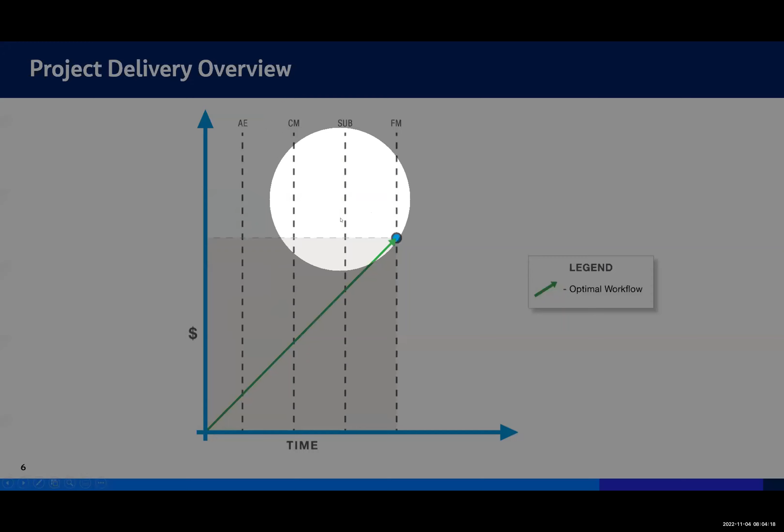The green arrow is the order of magnitude, the optimal workflow of how much work happens to deliver a project. Every project goes through different stages between architectural engineering design, construction management, or some sort of construction, and then we turn it over to trade subcontractors, and ultimately over to the owner, where the process of facility management operations starts.

Again, the easiest way to get from A to B is a straight line, but we all know that's not exactly how this happens.

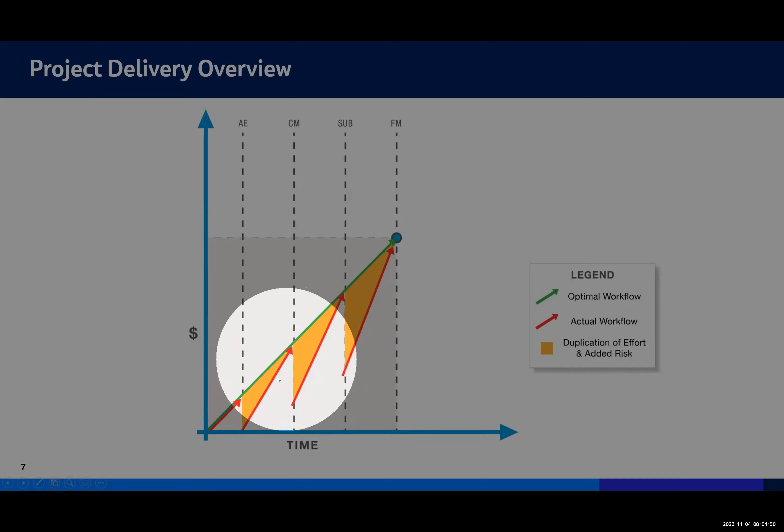Every single time we go through a handover, whether between our own engineers or to construction management or subcontractors, we have a drop in data, a drop in intelligence. There's a certain amount of rework needed to catch up to that optimal, perfect workflow that doesn't exist and will never exist.

So the red arrows are the actual representation of the actual amount of work that happens on a project to get it completed. And the orange areas, those little triangle areas below, visually represent where duplication of effort happens, the added risk and problems on projects, your change orders, all the issues we deal with that are not optimal workflow to deliver a project.

So if we truly want to understand how much effort it takes to deliver a project, we simply straighten out those red arrows. The order of magnitude you see now is how much it actually takes to build a project, and how far out it goes beyond that optimal perfect workflow depends on how integrated our project teams are and how optimal our workflow truly is.

So the extra time down here is the extra time our projects are really truly taking, and this is the extra amount of money it takes to deliver a project from the owner's perspective compared to that optimal workflow.

All we're trying to do with technologies and everything you're doing comes down to value, and how we can make the timing better, shorter, and cost less. So all we're trying to do in the overall process is reduce this delta, the extra time and extra money it takes to deliver a project.

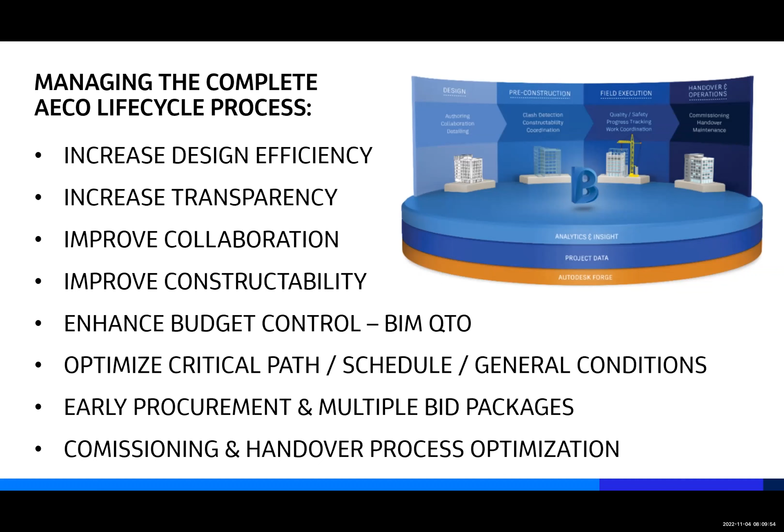But again, it takes us talking to our clients and letting them know what is possible out there. And when we look at current procurement methods, this is the challenge, right? How do we deliver all of this within the current constraints of project delivery?

So I did a class just a couple of years ago at Autodesk University, where it was actually a roundtable where we talked about project delivery, and we're trying to figure out what project delivery method is the best for your project, and why? Why should you choose one over the other? And we look into, how can we work within these constraints to deliver best projects?

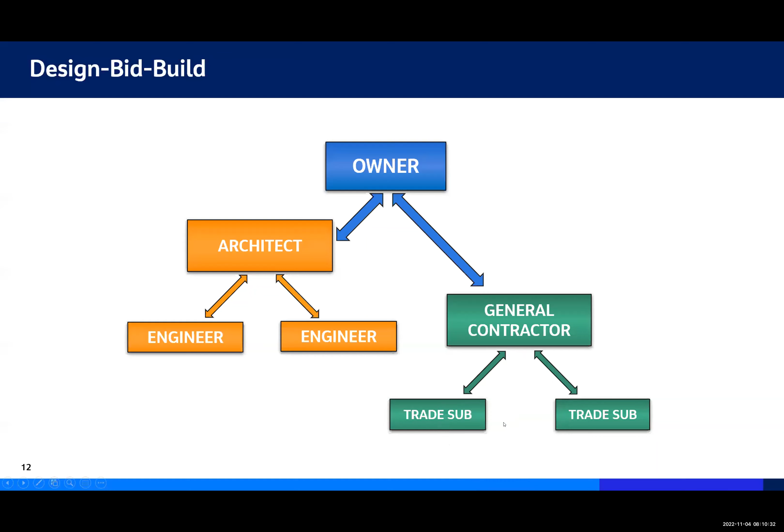So again, we look at design, bid, build, traditional, right? The owner is contracting with the architect and general contractor after bidding, and we have our engineers and trade subcontractors. A very traditional way of delivering, which seems to be fairly fragmented, right?

Then we have the currently very popular CMR process, the construction manager at risk, where the owner hires the architect and the construction manager at the same time, typically, or closely related. But then again, we still all have our subcontractors and engineers, but there could be that correlation to where there's a lot of design assist between how we deliver our engineering and design, since the contractor is hired at the same time. A little bit more integrated, right? But there's still a lot to be desired in terms of the process.

Design build, also very, very popular. A lot of different ways of doing design build, either through a design build contractor that hires all the subcontractors underneath, which has architecture engineering embedded, or sometimes the owner hires the contractor and then we work with the contractor, which I know a lot of us have our hesitations towards working for a contractor, right?

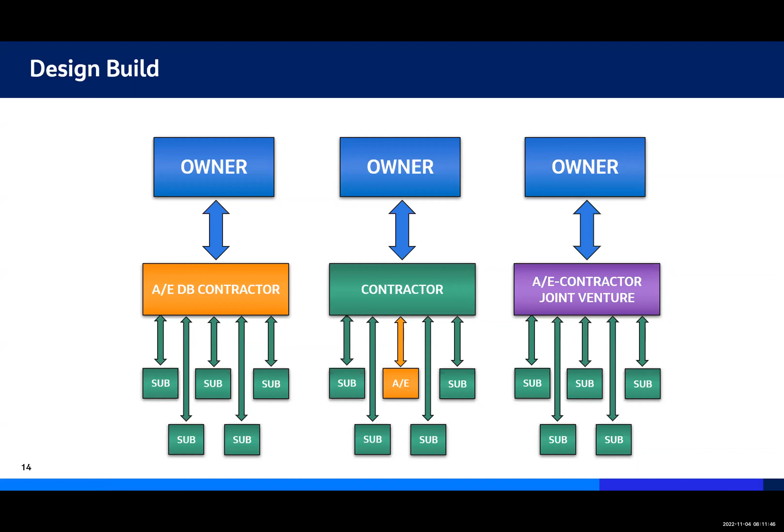And then we have a situation where the owner hires a joint venture, where we as the AE may joint venture with a contractor, and then we work together to do design build. And again, a lot of opportunities there, but again, there's still a lot of issues that can happen along the way. Still not optimal.

And ultimately, there's IPD, right? And for those of you who have done IPD projects, how many IPD projects are exactly identical? Right, there's a lot to be desired there. Yes, it's a lot more integrated, but again, the owners are still trying to fight the whole issues about having shared risks, shared rewards. They try to push their risk away as much as they possibly can. It can go really well, it can go really bad, right? And there's no prescribed way of what IPD is.

It's typically up to each individual contract to really define who does what when. And in this roundtable, we really looked into several factors, looked into contractual obligations, what the instruments of service are, liability, right? Are we delivering models? Are we delivering drawings? How are we delivering this whole process? And who does what, right? What are we contractually obligated to deliver?

We looked at different collaboration technologies and how much we actually collaborate between each and every one of these project delivery methods. What type of technologies are prevalent? What types of roles, responsibilities do we have as part of this?

Trying to understand who is doing what, why, looking at budget, schedule considerations, and the vast amount of folks that were in this roundtable, which was actually an online roundtable during COVID, fairly large, about 200 to 300 people. We concluded that really there is no one perfect method.

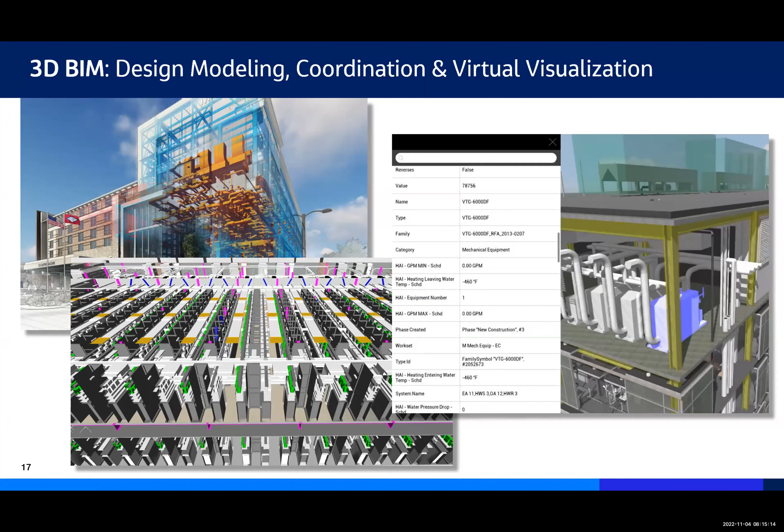So 3D BIM is the start of everything. We do everything in models. We're delivering all of our construction documents. All aspects of the project are going back to the model. We're doing design modeling, all of our coordination, spatial coordination, clash detection, visualization. Everything starts with that 3D BIM.

We're performing a lot of virtual design reviews. We're running a lot of clash detection between different elements. We track all of the issues associated with the projects that start in the models. We're trying to make the process much more intuitive rather than coordinating in 2 dimensions on drawings.

Greg mentioned a lot of different seminars and task forces that we work with NCARB on. We're looking at the future of what our industry is going to become. We're looking at that responsible charge - what have we been doing with our project delivery versus where we're going in terms of what our responsibilities are as architects, and what will responsible charge evolve to.

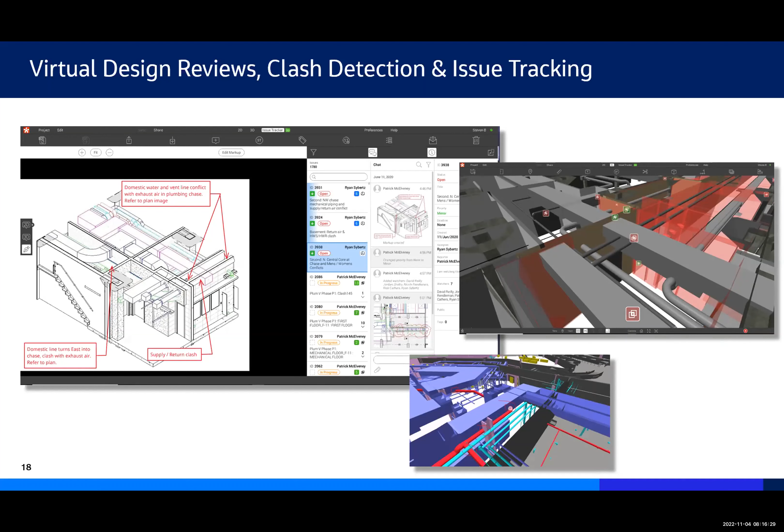What are the instruments of service? Are we starting to produce models more so than drawings? What level of drawings are we going to be producing? This is very different than the old ways of delivering drawings as the instruments of service, coming into a lot more model-centric approach. That's where all these dimensions of BIM are geared towards - exploiting the one source of truth that we have into multiple different use cases.

Along with 3D BIM, you might have heard this concept of LOD, or level of development - level 100, 200, 300, all these different concepts of what the requirements are. A lot of owners are starting to be a lot more savvy in terms of requesting different levels of development and different deliverables, because they typically hire architects on their own teams to streamline what they get at the end of the day and make sure they're not paying for something they're not using, but at the same time make sure the delivery teams understand exactly what they need to deliver.

So LOD is a concept brought by the BIM Forum, and it's a level of development. There's a whole big document called the Level of Development Specification that talks about, within each and every category, each and every spec section essentially, what level of development means for those elements. In the simplest of terms, it's the level to which we are required to develop our models in different systems and different components in a model.

So LOD 100 is kind of the most basic. You would think about this if you're doing SketchUp modeling, some schematics - you're developing very schematic type level of development, typically suitable for early conceptual design.

LOD 200 takes it a step further. You're starting to introduce some generic ideas, like hey, this is a column. It's not just a mass, it's a steel column.

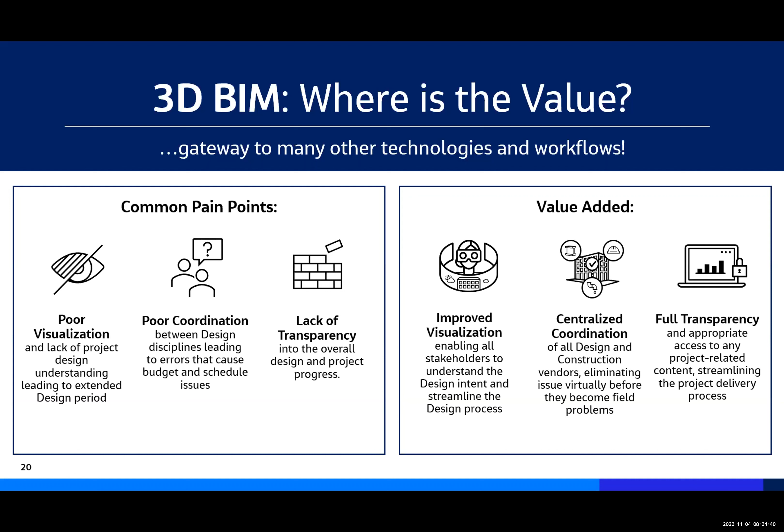And again, 3D is truly a gateway to all the other things. It's the benchmark. We can excel anywhere else with pretty much all the other technologies I'm talking about today. You can't go any further without starting with 3D design. So it truly is a gateway and a starting point to a lot of different things.

The next thing I really want to talk about is 4D. Once we have the 3D models, what else can we do with them? Well, one thing is 4 dimensions, right? Assigning the aspect of time with the modeling. We're able to really clarify the construction process and help our clients visualize, help the whole project visualize what this project truly looks like.

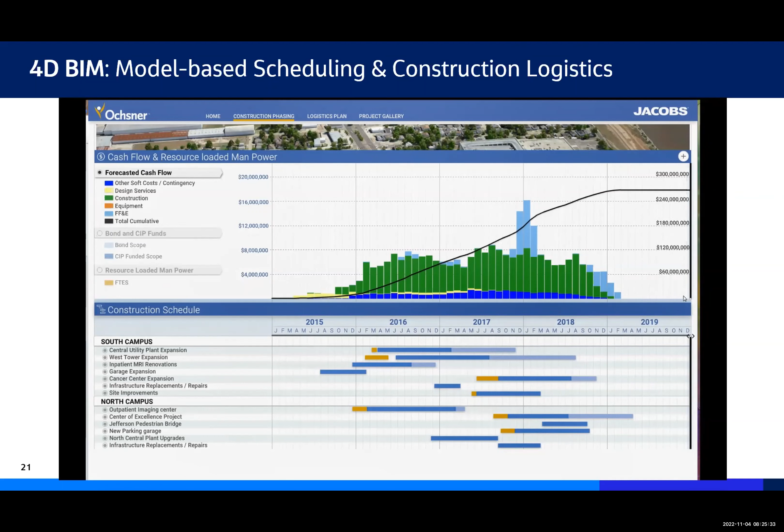We're able to look at a lot of metrics, a lot of different information, track the project much closer, and improve upon that scheduling aspect of the project by using the model elements, aligning them with the schedule elements, and looking at that progression. The reason why this is important is oftentimes schedule is a completely separate effort done throughout the construction process that doesn't have anything to do with modeling.

A lot of times there are issues that happen because of either poor scheduling, the schedule doesn't really get updated, and projects get behind schedule. We really don't have good visibility into what's being built when, what's the current state of the construction progress, and how we're progressing against the planned progress. It's very difficult to visualize this if we have a schedule completely separate from the model and design.

Furthermore, right now there are still a lot of projects required to be design-bid-build, that very disjointed process of design and construction. If we, as designers, still don't really try to understand how this project is going to be built—what does the logistics look like, how can we phase this to best serve our client—again, this is a contractor responsibility, but we need to work together to really optimize what we're designing versus what's being built, and how we stagger these processes to be much more efficient and serve our clients the best way possible for the most efficient projects.

So again, with 4D BIM—in a traditional way of scheduling projects, there's typically very poor communication between the teams during design and construction, and with the owners. Schedules are hard to read, and it's very difficult to align the two together, causing oftentimes a lot of different issues. The traditional scheduling process is very time consuming, updating the schedules. Because it's so disjointed, there are a lot of opportunities to make errors, and projects do oftentimes have a lot of errors with schedules and sequencing of how work should be done without the logistics analysis with the modeling. When we add the model aspect to the scheduling aspect in 4D BIM, we're improving the communication.

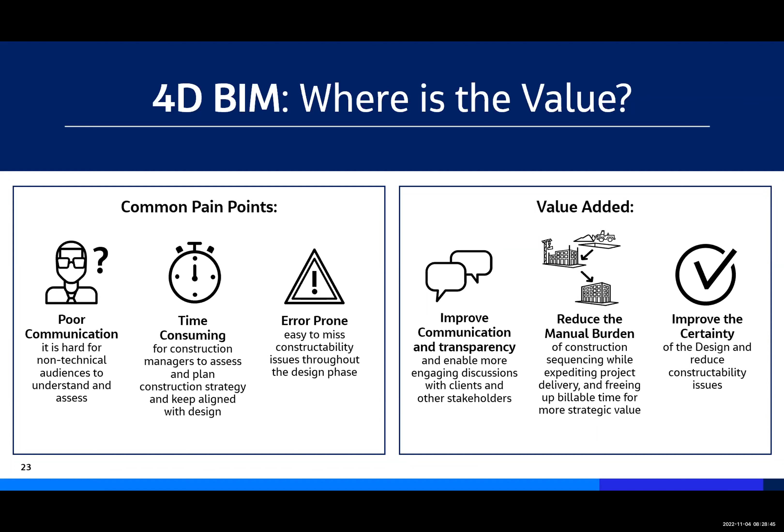When you look at construction sequencing and everything else, it's a very manual process, and we're really adding more intelligence and transparency to this, which really adds to the certainty of the whole process. Once we are aligning that model to the schedule, we know whether things are going to work or not, and we're able to correct those errors before we figure them out too late in the field. Hopefully that clarified what 4D BIM is and what the purpose of it is.

Taking that a step further, if we have detailed enough models, and I say this very carefully, if we have detailed enough models, we're able to pull quantities directly from the models. This typically does, when we talked about those procurement methods, 5D BIM takes it a step further. If we are sharing all of our models with the contractors, a lot of us put disclaimers: this is not for construction, this is just to inform the contractor of the overall general arrangement. I've seen a lot of types of disclaimers associated with sharing the models. But if we're truly exploiting the best of BIM, we would be working in a somewhat shared model. We would be inviting and co-creating to make sure we can leverage these models for quantity takeoffs.

Taking model-driven estimation can really benefit the owners greatly. If we do our own design models and a contractor does their own construction models, and then they do their quantities from their own models, that's just not a very streamlined way to do that. We can do this, but we have to think about this ahead of time, so we're not caught into, well, contractually I'm obligated to do X, Y, Z, and I'm not doing this. This is where the inefficiencies happen.

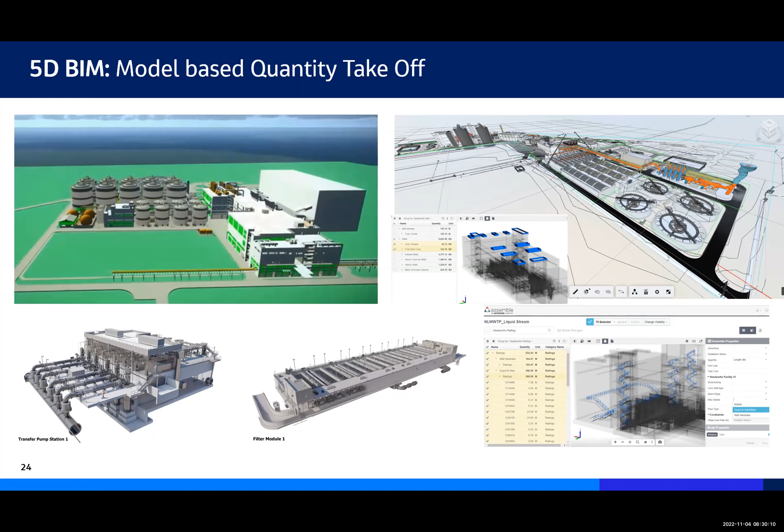And if we are in an integrated type of delivery process, we can start thinking about visualizing and quantifying that model, helping produce cost estimates and assist with a lot of different cost-related functions in a project. A lot of you might have heard the term QTO, which simply stands for quantity takeoff. We're really aligning the cost line items with model items, assigning the cost factor to model elements, and having a good understanding. This is why I said that LOD. If we're going to go to this level of detail, we have to understand what is modeled versus what is not modeled.

And the estimator must understand, okay, what else do I need to account for? All the general conditions, all the things that are not in the model. How do we really pull this all together into one seamless way of informing our client what we're doing, and what this project is really going to cost?

So what is 5D BIM solving? The common pain points of our current or typical process is that cost estimating is typically very slow and very labor intense. And we only get certain times where we do a cost estimate throughout the process. That's kind of the spot check at that certain time of, hey, here's what we think this costs. Probably it's beneficial to understand that, but it can be better.

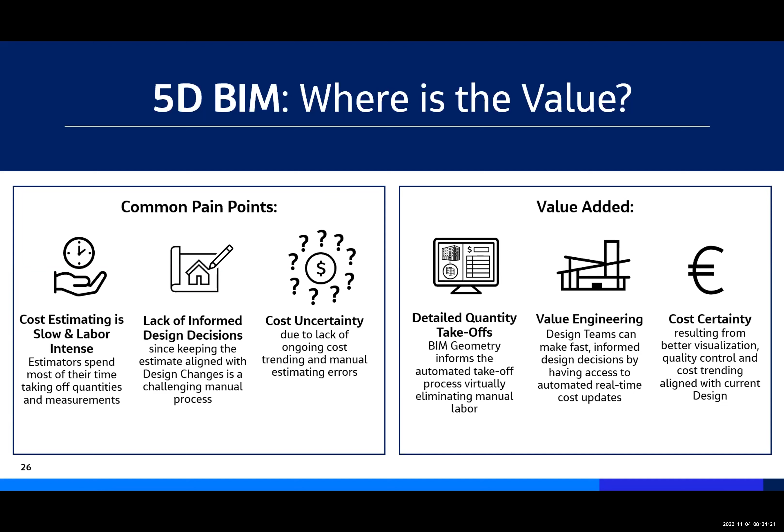But when you think about the ability to improve the overall project - and I'll talk about this a little bit more - our additional expenses to do all this are just a mere drop in the bucket of cost compared to the overall benefits to the owner and to the overall project.

I've been talking for a while. Hopefully I'm moving at a decent pace and not too fast. Any thoughts, comments, team? All good? Good to proceed? Good, all right, keep going. Let me know if I'm moving too fast, because I can slow it down a bit as well.

So 6D BIM, again, this is yet another progression. You've heard about digital twins, probably all the zinger words in the market right now, a lot of different platforms. I have a whole section at the very end for digital twins that I'll touch on. But the 6D BIM is essentially this handover process.

Everybody wants these digital twins, digital replicas of facilities that we're designing and constructing. So the concept of 6D BIM and digital twins, for our built environment purpose, is we're taking these 3D BIM models that we have diligently produced throughout the design process and probably adapted throughout the construction process.

We're adding a lot of information to it. We add a lot more detail about the built environment as we're constructing it - model, manufacturer, serial numbers, installation dates, warranty start dates, a lot of the nameplate data that owners may be using for maintaining their assets long after we're off the site. We're combining that 3D BIM and enriching it with all this information from the construction process.

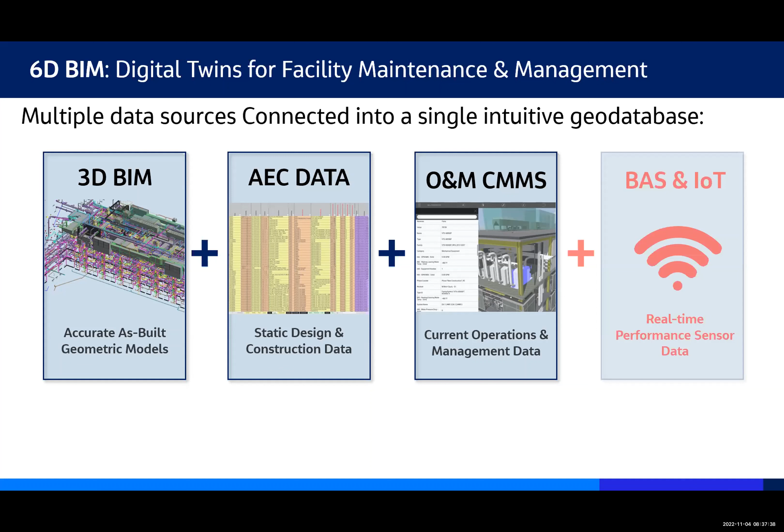We can tie that back to the 3D model, and we can provide real-time IoT, Internet of Things. We're adding a lot of sensor data feeds about current temperature, occupancy, humidity, any sort of factors about the current state of the built environment. We can provide that information as a layer on top of that 3D visualization, and we can provide tie-ins to building automation systems. We can start automating. You probably all have some sort of automation systems in your houses by now, a smart light, a smart outlet, or any sort of smart building systems. All this can be controlled and managed through a digital twin of a facility.

The whole point here is we have the ability in 6D BIM to create this single federated, uniform platform of all the systems and all the information about the built environment, including the ability to understand how it currently operates, as well as operate it and control it through the use of these digital twins. And that's what 6D BIM truly is.

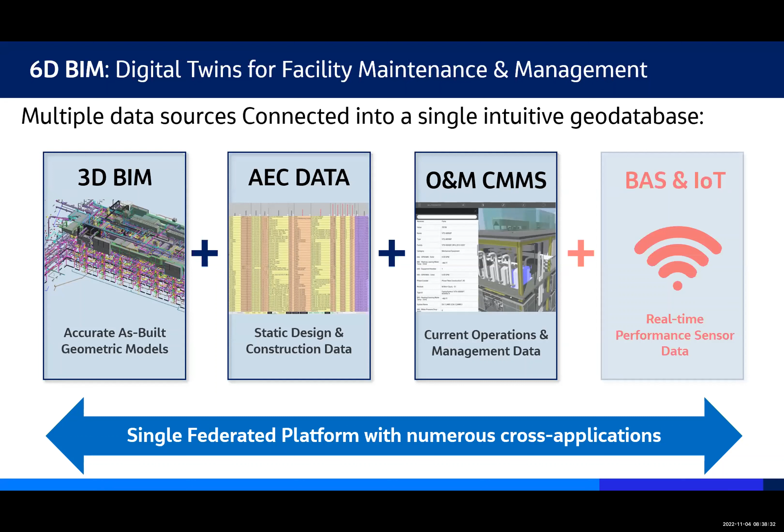I've heard sometimes this is referred to as 7D BIM. Sometimes they put in a 6D BIM as sustainability related. I'm still kind of keen on the approach of 3D, 4D, 5D, 6D BIM, with the 6D BIM being that digital twin handover of facilities with the models that we're able to create. So truly, like I said, the digital twin is in the center.

It doesn't mean that all information is in one place. You're not thinking that everything is sucked into this digital twin, or that we're going to push all this information back into our Revit model. That's really not the intent here. The intent here is to create the one place. The digital twin is almost like a hub that gets information from different resources. So again, the digital twin can get the geometry from 3D BIM models.

It can get all the asset data, the nameplate information, from COBie. A lot of you may have heard of COBie, which a lot of our clients, especially government clients, are requesting, which stands for Construction Operations Building Information Exchange, essentially a giant spreadsheet tied to the model that describes those model elements even more with that information.

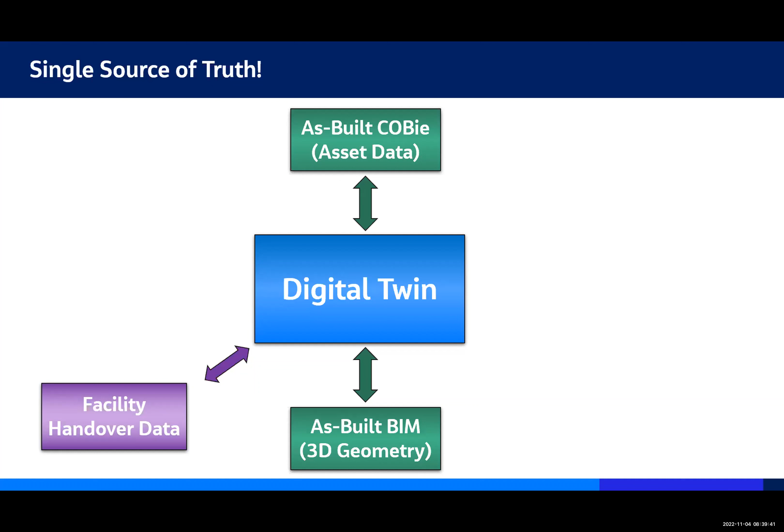The digital twin can get that information from facility handover data. Again, this may be stored somewhere in some sort of common data environment, Google Drive, server, whatever, but it can be organized in a certain fashion to where you're getting that information through the digital twin, so you don't have to go browse different locations for all this information.

Digital twins can tie back to CMMS systems. CMMS stands for Computerized Maintenance Management Systems. This is to manage your work orders and really to manage your assets as the owner. Again, you've probably heard of Maximo. Maximo by IBM is probably one of the most famous CMMS systems. But again, the digital twin doesn't replace the CMMS. It simply draws that information from the CMMS systems and is able to synchronize that information between the two systems.

And like I've mentioned, IoT data, sensors, again, the sky's the limit here. There's a lot of different cheap sensors that can provide a lot of insights about the facility. It all depends on what the owner truly wants to understand about their facility. We can overlay that on top of the digital twin.

The whole point of doing digital twins and the benefit is the ability to make data-driven decisions about your facilities. What should I replace? What should I move? How should I organize my space? Where should I move my people? There's a lot of different things you can do as the owner of the facility if you have a digital twin. But again, the use cases vary greatly.

And in order to be able to achieve those digital twins, I go back to that project delivery. There's a lot of different workflows of gathering that information to append to a model. So this is that information, that COBie spreadsheet that I mentioned. This is what COBie looks like if you've never seen a COBie spreadsheet.

And again, if you just hand it over, a lot of owners are asking for COBie. What are they doing with COBie? They may not do anything with it because it's sometimes thousands and thousands of rows of information that are impossible to navigate through if you don't know what you're looking for. So again, providing and deciphering this and making a system to take advantage of this is much better than just providing the COBie spreadsheet itself.

And as you can imagine, this won't happen by itself. A lot of owners start asking for this after design and construction is done. Well, that's really not the optimal way to do things, because then we have to go back and recreate a lot of these things, probably the least efficient way of creating these digital twins. If digital twins are the end goal, this is something to be discussed early on.

This is where integrated delivery is really, really critical, because in order for digital twins to succeed, there's parts that the owners need to do, the facility managers, the architects, the engineers, the general contractor, trade subcontractors, even additional technology partners, different systems to specify. It's a very integrated process that's oftentimes delivered as an afterthought. I'll dive a lot deeper into this later, but a lot of times these efforts fail, and now you can see why, because it takes very close monitoring of the overall process of how you actually do this.

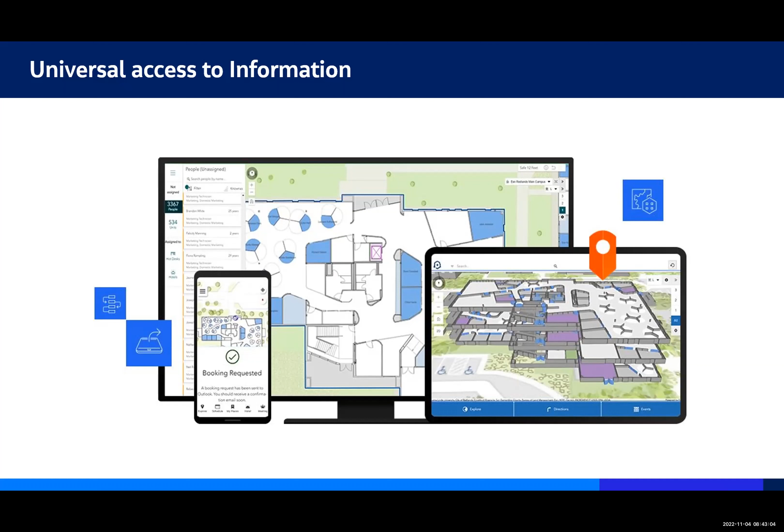And the whole goal is, again, we want to provide universal access to information to anybody who may be utilizing this facility. It could be a visitor, a patient, a student, a facility manager, a real estate manager. The sky's the limit here. There's a lot, but the premise is the same. We're making this information available in the format that makes the most sense as part of the digital twin.

And 6D. So again, we use digital twins as part of design and construction. They're truly an accurate representation of the built environment, which is a benefit in itself. It gives us digital access to that information in a very streamlined way. We don't have to look for all that information.

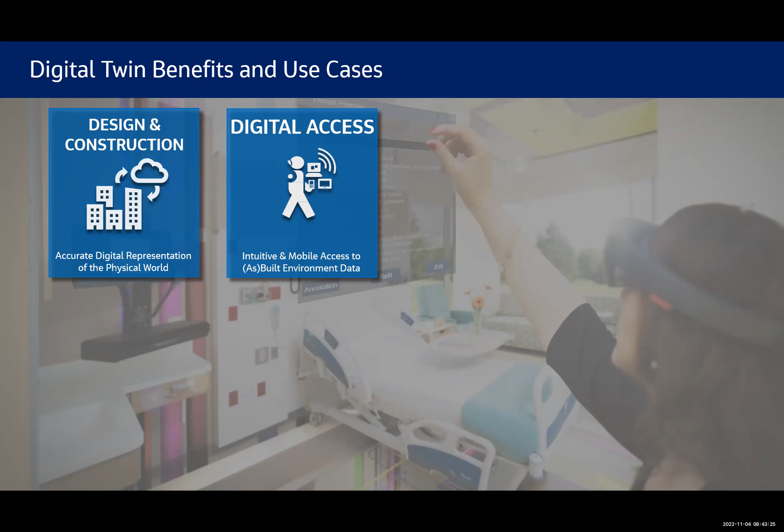There's a lot of opportunities to streamline operations and maintenance, the work orders, proactive maintenance, probably even leveraging some machine learning and artificial intelligence to analyze and predict what's going to happen in the facility before it happens, so we can optimize that process.

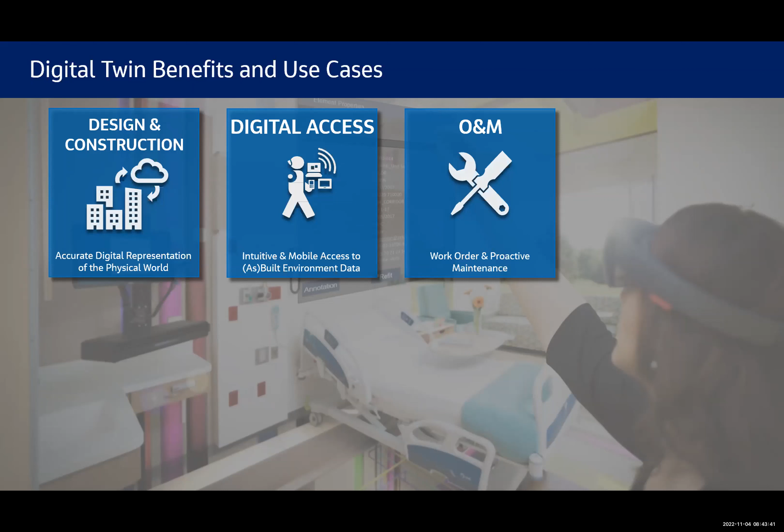We can optimize the performance of a facility. If we know how the facility is performing at any given time, we can see deviations and make informed decisions to optimize the performance of the facilities. Again, we can enrich and understand our facility better through the use of sensors that are feeding information into digital twins. There's numerous end user applications, whoever the end user is.

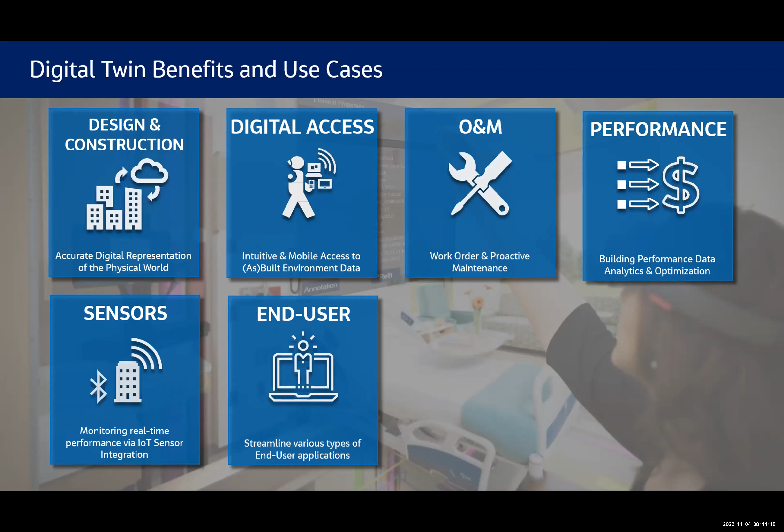Again, it doesn't necessarily mean that it's just a facility manager. It can be anybody who's occupying the facility can make use of digital twins if that's the end goal, right? Wayfinding, again, a lot of times is spent trying to locate and navigate different systems and understand what's connected to what. Providing wayfinding to those assets really streamlines this process a lot. Wayfinding could be too, in terms of wayfinding through different facilities.

How many times have you gone to a hospital, and how long did it take to find your way to the right place where you need to go? If you're a patient or a visitor, if you had a digital twin of that hospital, you can know exactly where you're going through the use of that application. A lot of different use cases and a lot of different augmented reality, which I'll touch on in a little bit. There's a lot of different ways to leverage the digital twin for different overlays, so you're understanding and have access to a lot more information than you would without having that digital twin in front of you.

I know that's a lot. I promised a lot of content, a lot of information. Hopefully you're still with me, and hopefully you're following along, and hopefully I'm not moving too fast. So any comments, questions? I'm trying to monitor the chat questions, but I don't see anything coming in yet.

There are a few questions in the Q&A. Okay, maybe okay. I was looking at... I'm not looking at the right Q&A. Then I'm looking at host and panelist. I'm not seeing the correct Q&A. Would you mind maybe having a brief, if you wouldn't mind reading those to me?

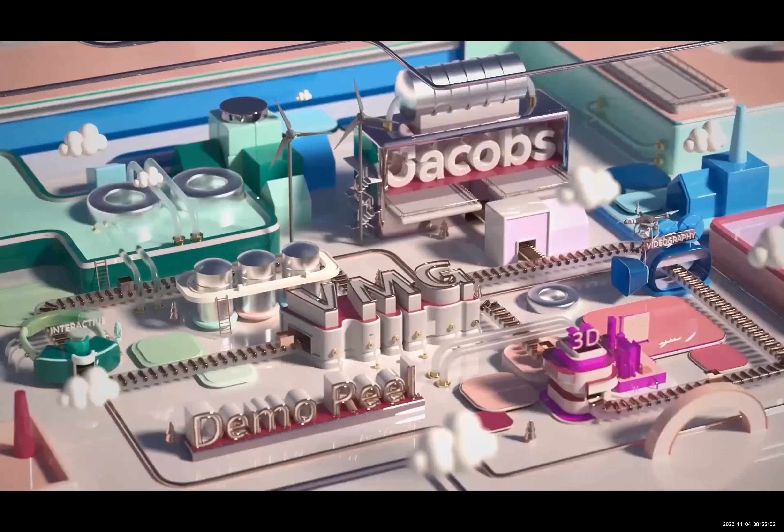So I'm going to show a quick video that we put together as a highlight of our VMG demo reel of what visualization can produce. Again, it's all about storytelling, visualizing and speaking to a lot of different concepts to the clients to help visualize what we're doing and gain consensus.

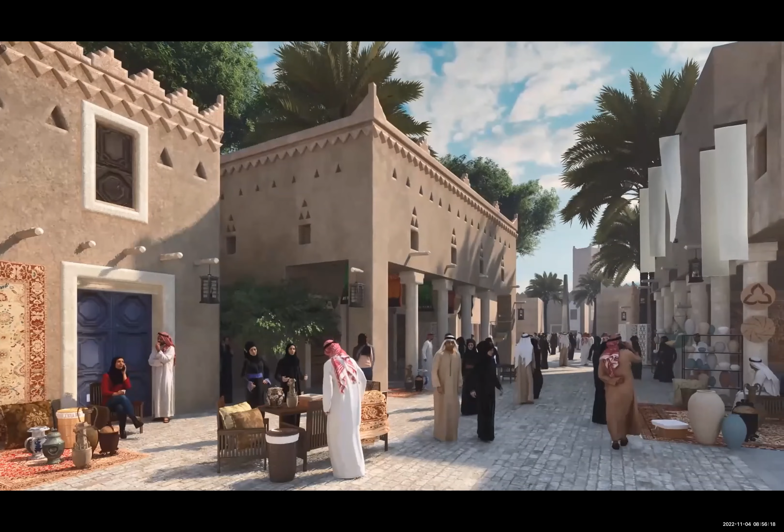Sometimes it's used like this, augmented reality, after the fact, being able to access information about it. Visualization through virtual reality brings information closer to people, creating virtual spaces that let them understand better what you are doing. And again, creating those digital twins at the end that help our clients with the information we created.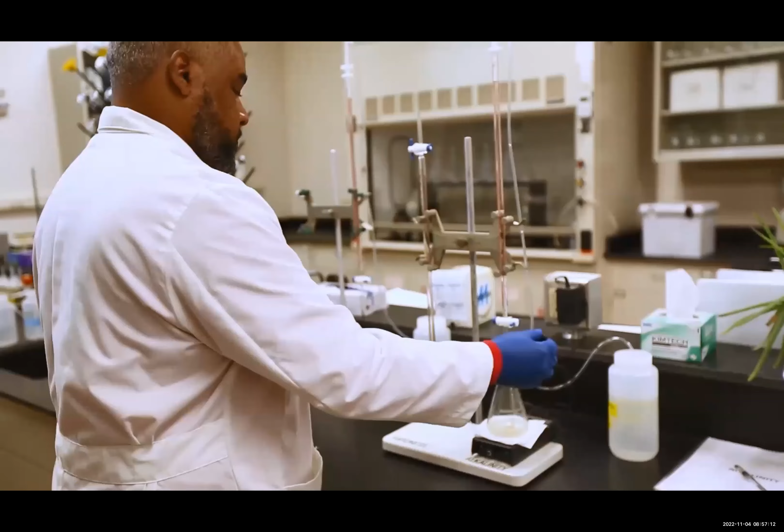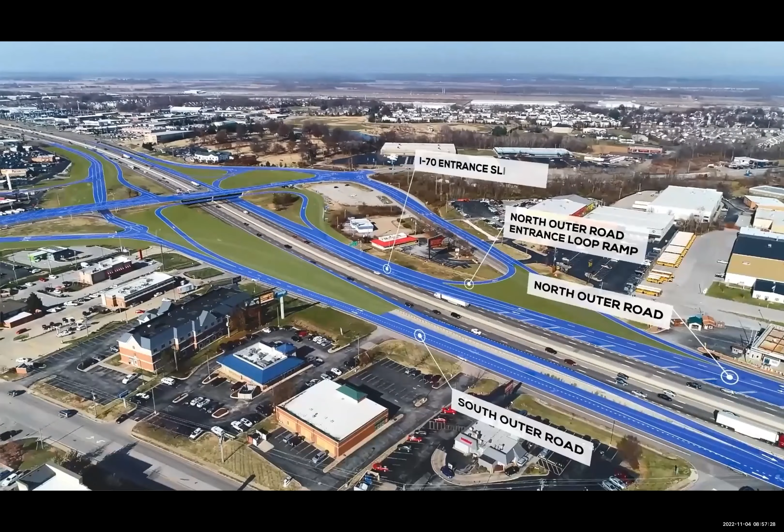In visualization we can create a lot of renderings, different ways to portray exactly what it is we're doing, and streamline that process to be more transparent. Visualization can also be about storytelling, showing a lot of information and bringing it closer to those who need to make decisions. We do a lot of drone work too, to help visualize those concepts and portray a big picture of what we're doing and gain consensus.

So there's a lot in here, a lot of different options. We have a whole team at Jacobs called Visual Media Group, a global group that helps a lot of our projects with specialty visualization needs.

You've all heard there's so many different things happening with visualization right now in the world, lots of acronyms between VR, AR, XR, MR. What is all of this? So I'm going to try to decipher it a bit between the different types of extended reality. You've all heard of virtual reality.

You probably see a little shelf behind me with a lot of different virtual reality tools I use daily with our designs. Virtual reality is simply putting on a VR headset and being fully immersed in a completely different world. You have no awareness of what's going on around you - you're fully immersed, 100% in a different space.

That's VR. On the other end of the spectrum you have AR, augmented reality. This can be achieved through headsets that let you see the reality around you and augment it by providing an additional layer of information. So if I put on my AR headset, I could see more information about the lamp I'm looking at right now, for example, with an overlay of that information.

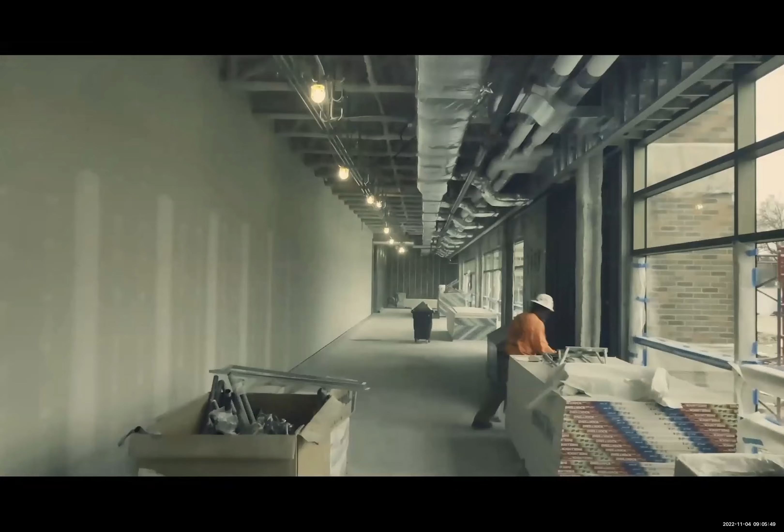This is the Revizto model where you're able to overlay 2D and 3D drawings, sections, and details to a high level of detail in animations, comparing actuality versus reality across different models, and looking at animations that present the virtual space years ahead of construction, yielding exactly the same conditions at the end of the day, giving stakeholders the ability to truly understand that what they see is what they get.

And having that level of development, this is the actual space I was just showing after construction. These are animations derived from the exact same fabrication model.

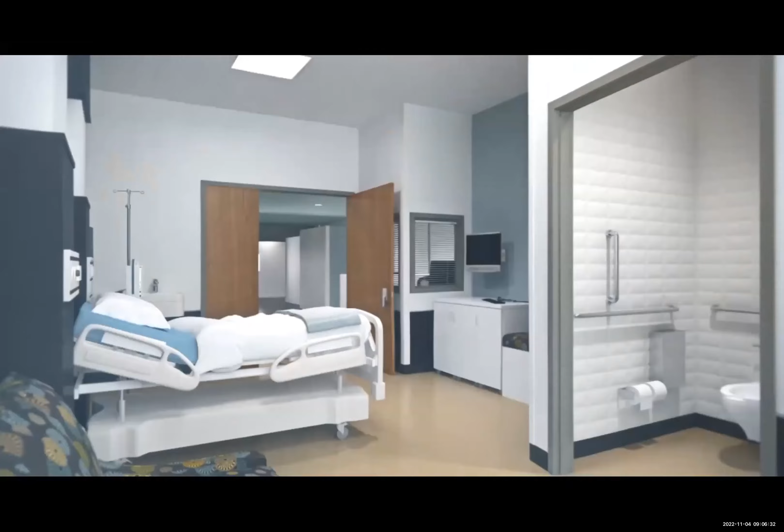This is an LOD 400 example showing the level of coordination between different systems, and the comfort end users have when their animations and virtual reality are created exactly from the same models used for construction. This is an actual photo of the built condition of that same room.

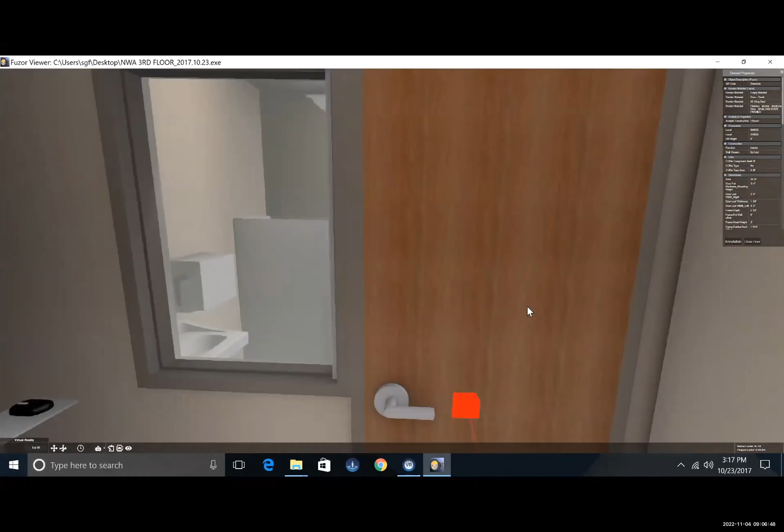With my previous employer, we did a lot of virtual reality simulations. We brought in surgeons, doctors, and facility managers and let them interact with the space and tell us about it, which really helped our design process optimize and do a lot of value engineering. Some small changes yielded hundreds of thousands of dollars in optimizations that wouldn't be caught on drawings but were caught through different visualization methods.

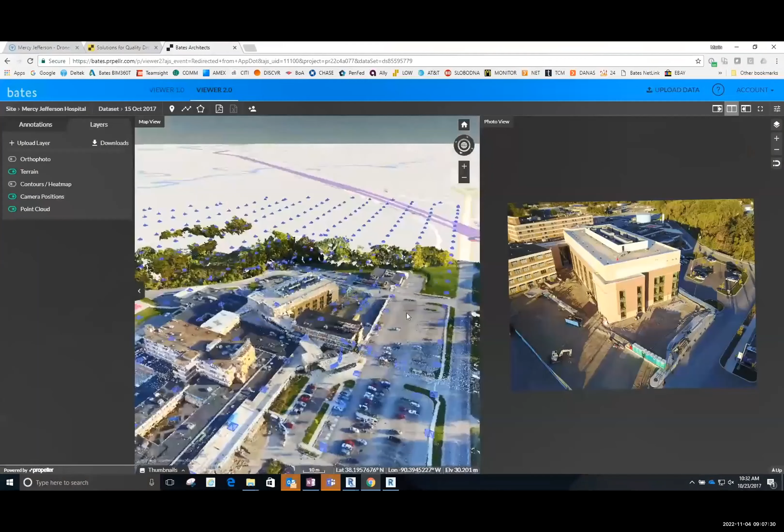And it starts with very accurate conditions. I'll talk about reality capture in a second, but even being able to visualize photogrammetry of current construction sites and construction logistics, and bringing this level of information into project meetings for all stakeholders, is very important. It all works together to streamline the overall process.

So I mentioned some use cases, like Visual Live. This is particularly interesting because it gives you the ability to use HoloLens type devices that can be mounted directly to a hard hat. You're able to be in the field and overlay augmented reality, whether on tablets, HoloLens, or different devices, if you have those 3D models. Remember how I said 3D models are the start to a lot of different technologies? If we didn't have those accurate 3D BIM models, we wouldn't have anything to look at.

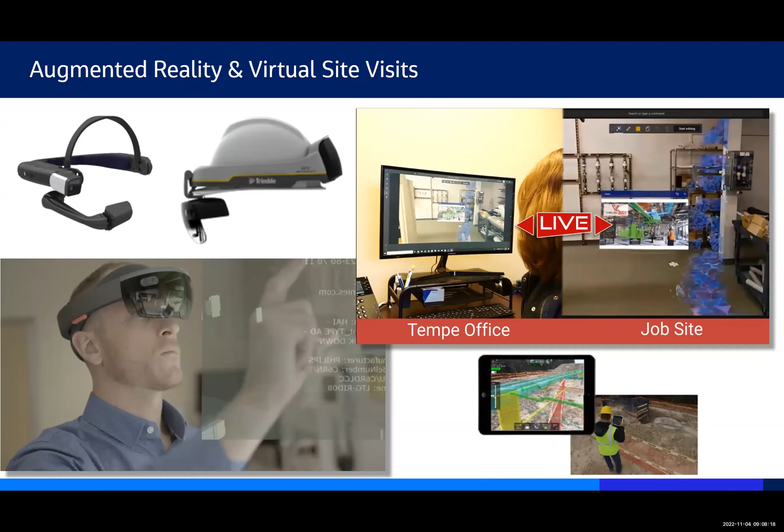So all of this is derived from the 3D BIM model. It truly is the starting point that enables you to check for quality and accuracy directly in the field. We do a lot of animations and augmented reality overlays, including drone visualization and drone videos, then overlay those with simulations of either construction sequencing or finished products to make sure everybody agrees and understands exactly what they're getting.

We do this across a variety of different projects. And with virtual reality, sometimes it's okay to be fully immersive, to coordinate and really look into those projects and walk through them yourself. We sometimes use it on sites for safety training in particularly hazardous conditions, training personnel in virtual reality to eliminate risk factors and make sure everybody understands what they're walking into.

So there are a lot of different applications for virtual reality. Personally, I've worked with healthcare clients and optimized their designs, saving hundreds of thousands of dollars on things that were on drawings for ages but nobody saw. A quick 15-minute review in virtual reality with nurses who use the spaces every day helped optimize those designs and literally saved, I'm not exaggerating, hundreds of thousands of dollars.

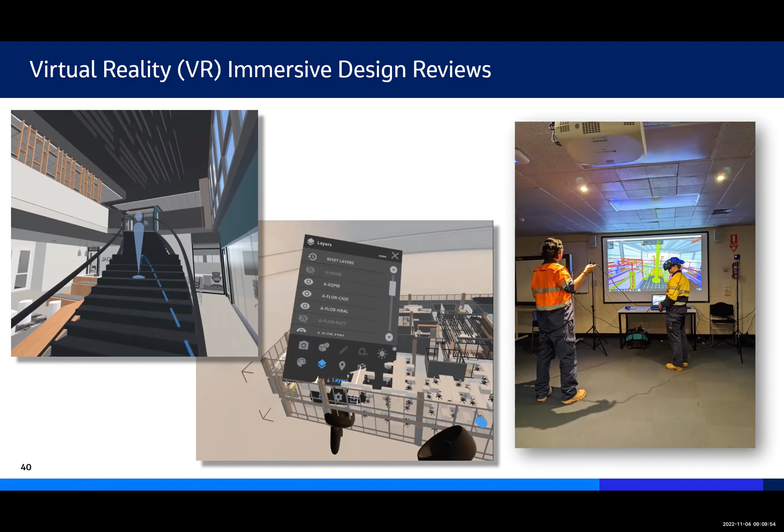So my point is, it's not a gimmick. It truly can help your process if you're using it as part of the process, not just as a presentation given to you in VR. It can be much more than that.

And finally, we get to the concept of the metaverse. A lot of you have heard of the metaverse, and there's a lot of controversy today about what it is and what we're doing with it. It's truly a virtual world that key players are trying to create for people to live in, work in, shop in, and interact with others, all from the comfort of my chair. I can go into the metaverse and do all those things, to a degree, to interact with other people there. A lot of companies are going down that path.

You've all heard of Facebook, now Meta, which completely changed their business model to create the metaverse. They've lost 70% of their wealth since doing that, but they truly believe in the metaverse and they're going to stay on that path, even if it destroys them. Epic Games, Unreal Engine, and Microsoft are also key players in developing the metaverse.

Think about the big reason this is happening now: remember the world without the internet? Then the internet came and changed how we do things, and we evolved into what we could do with it. Now we're streaming movies on Netflix and doing things that weren't even a concept before. The internet evolved, and many companies believe the metaverse is the next iteration of the internet—the next evolution.

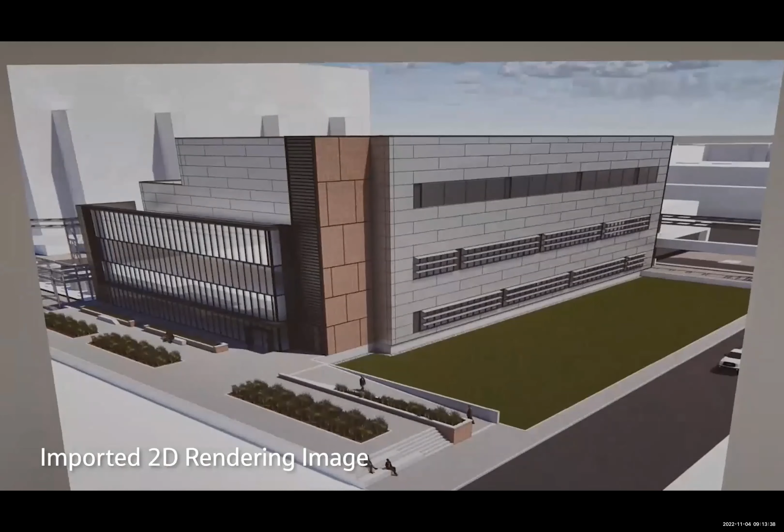This isn't just a concept out there somewhere—we're using the metaverse on some of our projects with some of our clients. What you're seeing here is the Wild, a platform Autodesk acquired that lets you create virtual environments to invite people into and coordinate with them. Right now, we're actually running a virtual conference room where we've pinned 4D animations and different assets, imported models, and invited people into this virtual space to review a project the way we would in a physical conference room, with the added ability to do so much more.

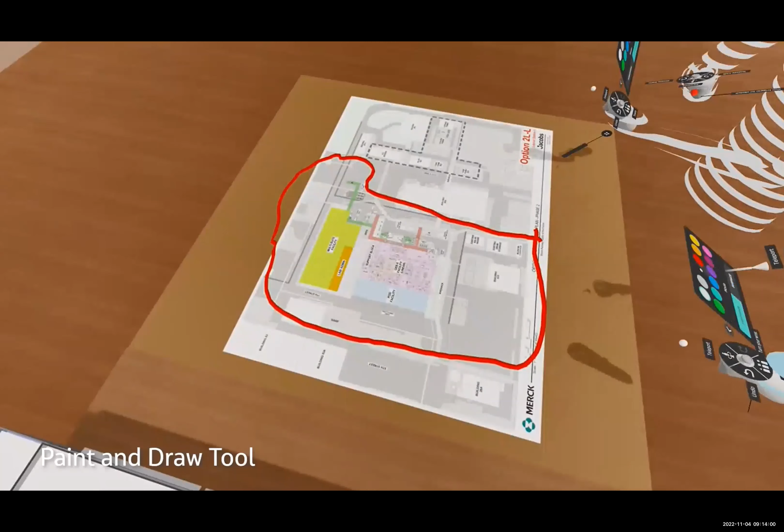We're able to see each other's avatars, look over a site plan, and mark it up. This team was spread all around the world—some people were in VR, some were on their computers, and we actually set up a physical representation of this conference room, so some people were in the physical room as well. We brought in models and different environments, interacting with everybody to walk through a design review and progress meeting, looking at different aspects all in one place.

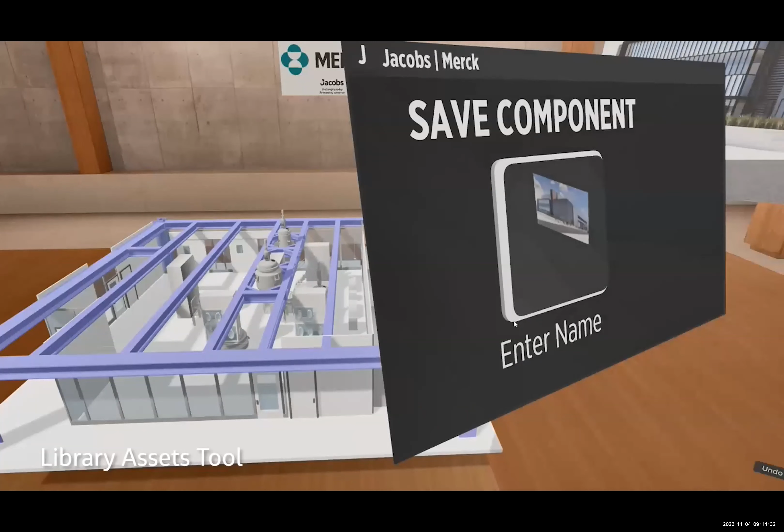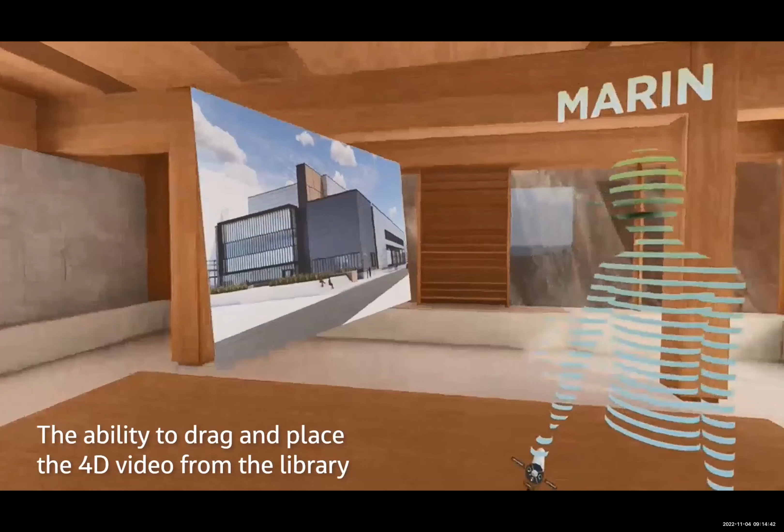This is that metaverse aspect of collaboratively working in a space together, able to talk to each other directly through the headsets. We could go to different rooms and have separate conversations. Spatial audio lets you do this—if me and Allison went into one corner of the room and two or three other people went into a different part, we could have separate conversations, and it understands where you are in the space.

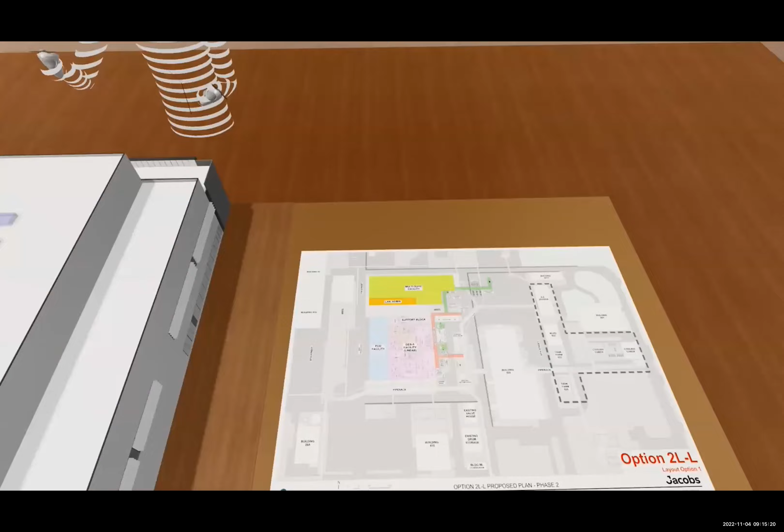Right now, Allison was taking me into a different environment, so she and I went somewhere else that I'll show you here in a second. We're able to review certain aspects, create multiple rooms, and really have a very streamlined, efficient, productive meeting in different environments.

And again, we can bring in different models, we can go directly into those models, review certain things, put different notes, create annotations. Again, this is the collaborative aspect that is simply not available when you're looking at 2D drawings.

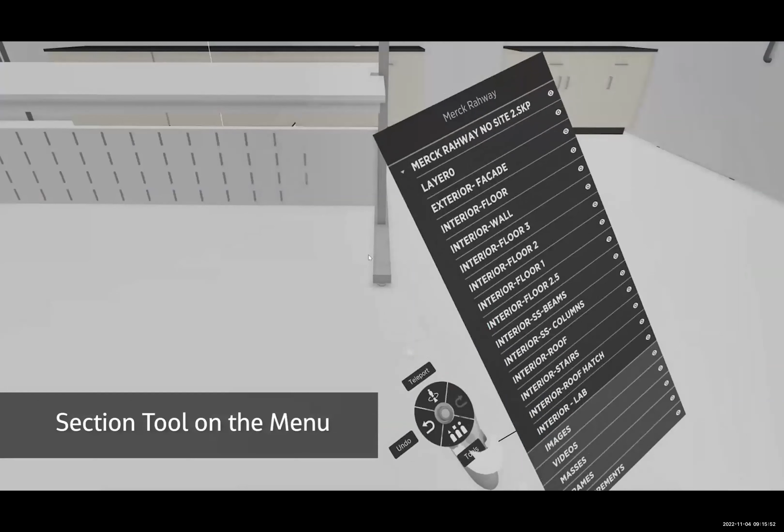So like I said, a lot of different options from metaverse. We certainly keep a close eye on it. A lot of our clients are requesting their own versions of their own environments of what they could do with it. There's a lot of opportunity here, and you should look into it. It would be my recommendation. Understand what's going on with it, and keep an eye on it, because it is coming. It's a lot more collaborative way of doing things.

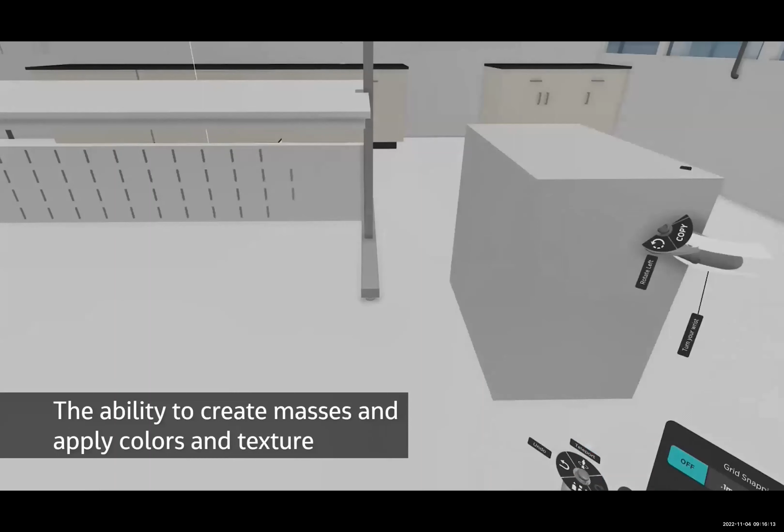Anyway, I'll skip through this video in interest of time and move forward. Any question about visualization so far? Let's see.

I've got some questions here that are kind of similar, so I'll read a few of them. How willing are clients to invest the money for these types of processes, the BIM 3, 4, 5, 6D? Are they built into the cost of project delivery? What's the lowest cost way to begin with this kind of technology in the field? And also some examples of how the VR experience saved clients money.

Let's put it this way. On our end, not doing something is cheaper than doing something, right? So all these things I'm talking about - 3D BIM is a direct replacement for what we're doing with 2D drafting and documents. 3D BIM allows us to create that, and replaces it. So we should not be charging more for 3D BIM, the baseline, because ultimately, if you're doing it right, it should save you money and your client money in how you're doing it.

But all these additional things - the animations, the virtual reality, the 4D scheduling, all these different aspects - yes, they're going to cost more money than not doing it. This is where the cost-benefit analysis needs to happen. The owner needs to truly understand what they're paying for and what they're expecting out of it. If we're doing it just to do it, it probably doesn't make sense. But if we're targeting a specific problem and solving that problem, it absolutely makes sense.

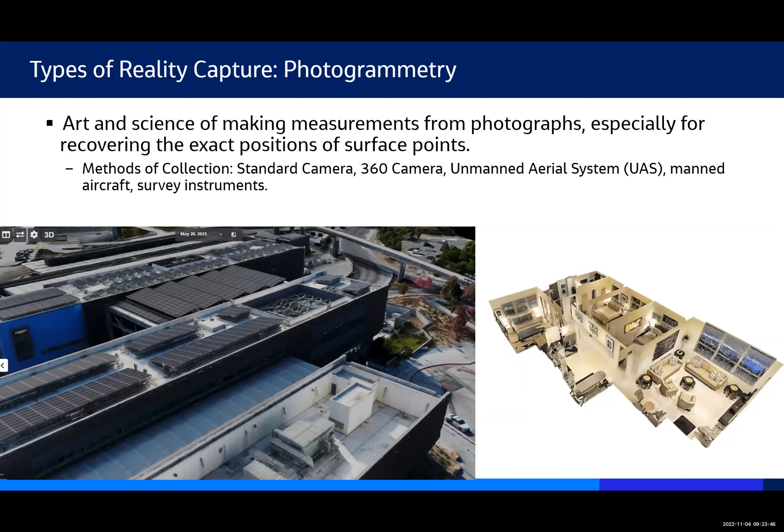Believe it or not, this is a 3D model created from 2D photographs from a drone. You can get a lot of imagery, a lot of quality from that as well. Photogrammetry is typically not the cleanest, not the most accurate, but it is probably the fastest way of capturing the world around you. I've got a little drone behind me that fits in the palm of my hand, but I've captured some tremendous data sets with that little tiny drone that costs less than $1,000.

LiDAR, or laser scanning, is another way of - probably the most popular way of - capturing the reality around us. A lot of you have heard about laser scanning; it stands for light detection and ranging. It's literally sending millions and millions of laser beams, bouncing them off objects and capturing information about how far it is, what it looks like, what color it is, and interpolating all those points into what's called point clouds to create laser scans, which are identical replicas of the world around us. They're probably the most accurate and highest quality way of capturing the world around you. Having said that, just like virtual reality, there's a tremendous amount of reality capture devices out there.

You can start from a $20,000 laser scanner all the way up to like a $150,000 laser scanner. You can hold them in your hands, and this is about a $50,000 scanner.

You can put them on a car and drive down 60 miles of highways at highway speeds and capture reality. You can put them on your body if you want and walk around and capture information. You can fly a laser scanner with a high precision drone. You can put it on your back as a backpack. You can hold it in your hand. You can drive it around as a cart. You can put it on a tripod. There's a lot of different ways to capture, or a lot of different laser scanners.

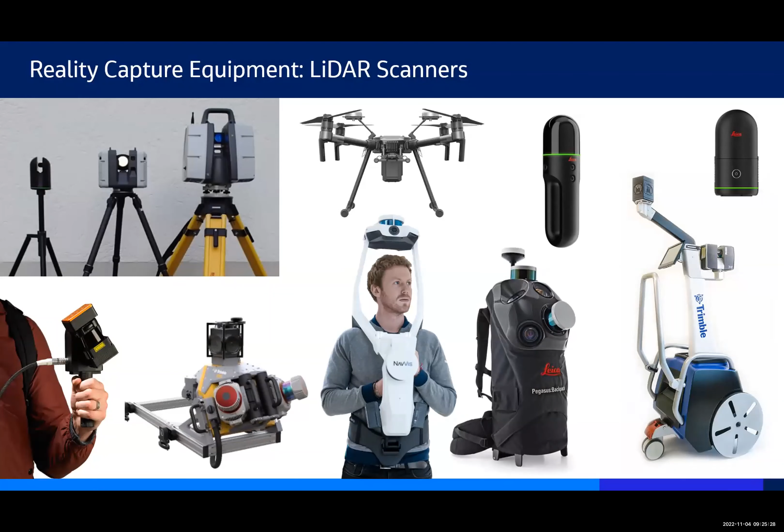Similarly to that, there's a lot of different 360 cameras to be able to capture. There's high-end cameras, there's handheld cameras that I have over there. This is actually my hard hat that I use on projects to capture things with my 360 camera. You can use them handheld with a little selfie stick. You can put them on a tripod if you want. A lot of different form factors. You can do 3D cameras like the Matterport camera here, a new Matterport camera.

These solutions vary from $400 to about $5,000, right? It all depends on what you're trying to achieve with 360 photogrammetry and 360 cameras. Again, it can be very convoluted, and I'll share something with you that I can share after the fact as well that hopefully will answer a lot more questions about it.

When it comes to drones, there's, again, same type of picture here. There's the small little drones like the one that I have, to mounting different types of cameras, thermal imagery, laser scanners, fixed wing drones, very simple camera drones, drones that fly themselves with laser scanners, autonomous drones, the drones that will fold themselves. This is the identical one that I have. There's a lot of different options, and here they vary from $500 to probably $50,000 for drones as well. The sky is the limit. It all depends on what you're trying to capture.

And then last but not least, autonomy. It's coming to be very, very popular. You know, Trimble Spot, the little very fun to play with dog-like robot from Boston Dynamics that you can mount laser scanners on, to Boston Dynamics platform that now comes integral with Leica cameras that can do fully autonomous, or navigate it with your own handset, if you will, to autonomous drones that can capture.

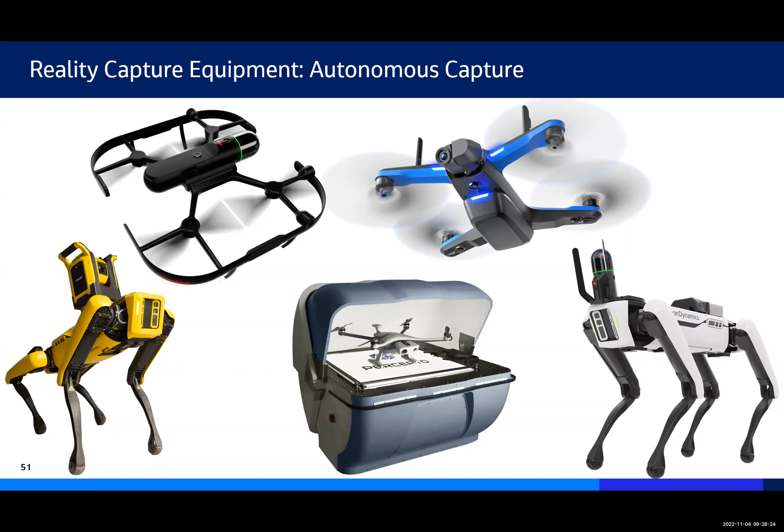And then when it comes to platforms, this is where it gets even more difficult, right? There's so many platforms for 360, for LiDAR, for construction progress tracking, Reconstruct, OpenSpace, HoloBuilder, Sync Cloud, management of clouds, registration of these point clouds like Recap Pro, Leica Cyclone. There's a lot of different options here.

So again, to be able to do this, you need to have a professional that understands what's available right now and what are you trying to do. Likelihood is if you try to do something, there's a solution for it. But you need to ask those questions up front. Are you using this during design, construction, operations? What are your deliverables? What are you trying to do with it? What data are you trying to collect? What's your budget for doing this? What type of project is it? What are the site constraints?

Again, we kind of did this process where I created a brochure called Reality Capture Technologies and Use Cases.

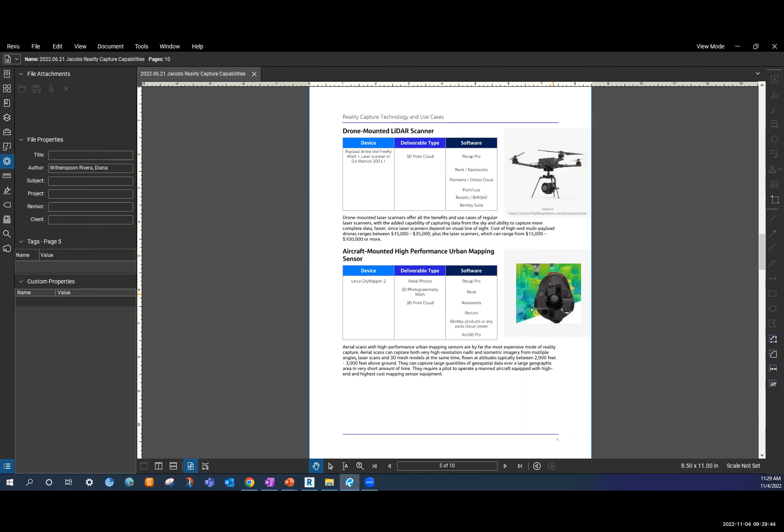We created that brochure to go down to technology devices and explain the different options you have: 360 and 3D cameras, tripod-mounted LiDAR scanners, handhelds, wearables, vehicle-mounted cameras, drone-mounted cameras, drone-mounted LiDAR scanners, even manned aircraft solutions useful for citywide capture, ground penetrating radar, and remote assist devices like I talked about, then aligning those to services throughout the project lifecycle.

This covers what type of service during the design phase, what type of deliverables, what recommended capture hardware, and what purpose and benefits you would get. I'm not going to go through all of it, but you can see design, pre-construction, construction phase, different types of services you can run, and recommended hardware and software.

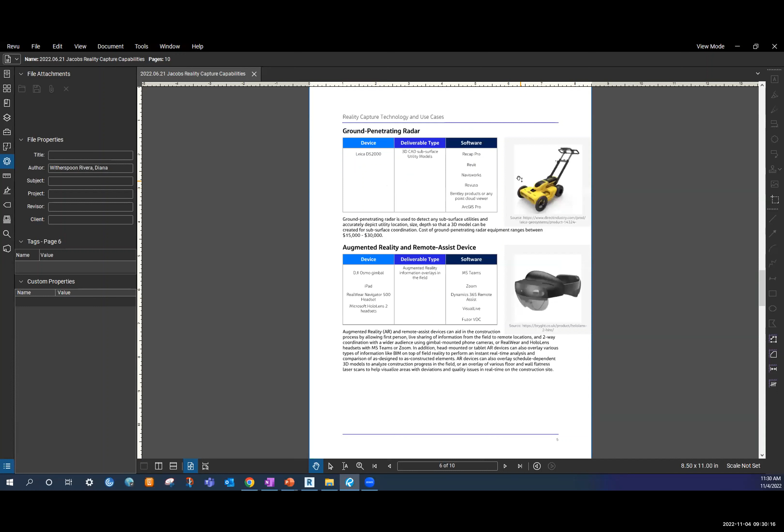We created this internally just to educate our clients, to understand what is the art of the possible, what can we do, what is it going to cost, and what to use it for.

From that perspective, I thought it'd be really handy to show you. I think I have a few minutes, so I'd like to show you a couple of solutions of what this can look like.

This is a Matterport scan, which you've probably seen if you bought a house recently—those 360 walkthroughs. Let me make it large screen. This is our current office in St. Louis, which we're moving into a new location. I did an existing condition scan with a Matterport so our design teams can go through and get information about the space.

They can do quick measurements because this was done with a 360 3D camera, so I can create quick measurements about the space and walk around to get greater insight into the project. Because it was done with a 3D Matterport camera, it also created a 3D model of the space, which I could import into Revit if I wanted. But a 3D camera isn't really the most accurate way to look at things.

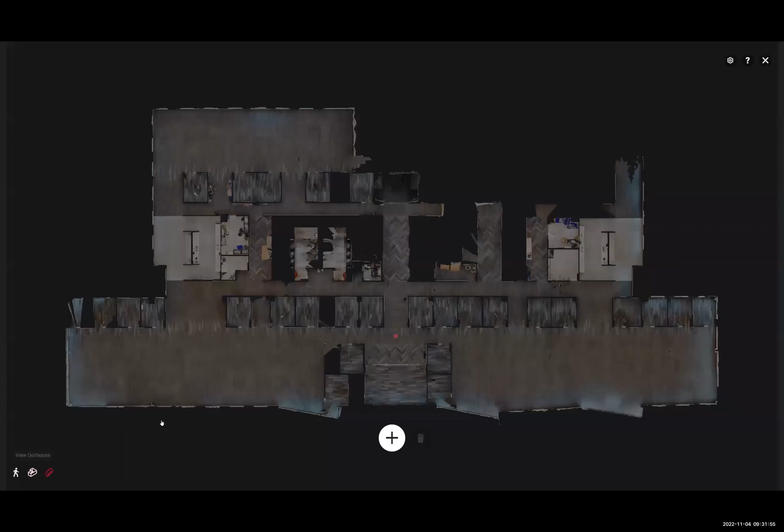There are more accurate ways of capturing this information as well, but it's very useful for creating existing conditions. It's a little time consuming, but it can provide a great amount of value to project teams.

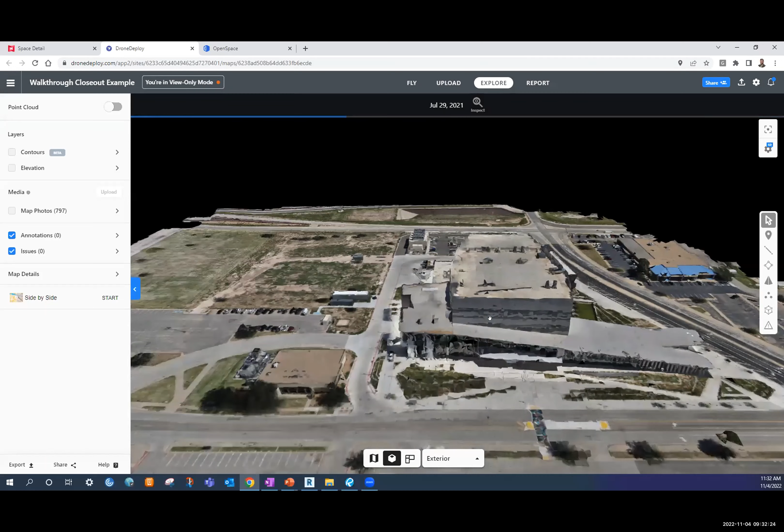If I wanted to, I could have captured the same information using a drone. Drones are used a lot for photogrammetry, as I mentioned. You're capturing a lot of information about the site itself, and you can go into aerial imagery or into a 3D model that a drone created. I didn't capture this one myself, but this level of detail would probably take—

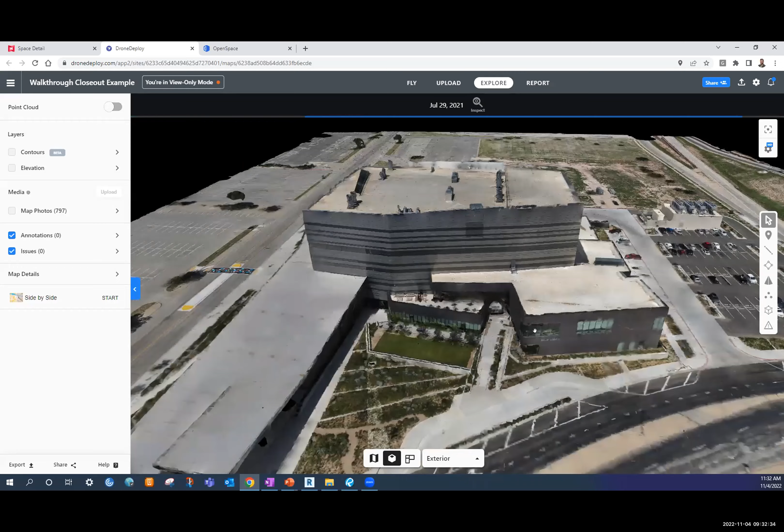I'm going to put it in 3D mode. I could probably capture all of this in less than an hour. It's still spooling on the cloud, but it's providing information about the project. You can do this from time to time to track progress, and do historical overviews of what's been built when.

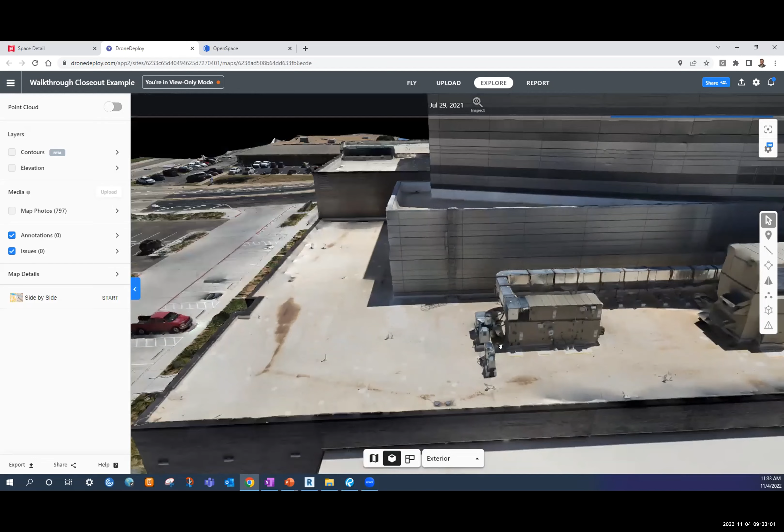You can see it's capturing a decent amount of detail, but if you look closely, it's still kind of a melted marshmallow—photogrammetry tends to create these meshes, which are sometimes not as detailed.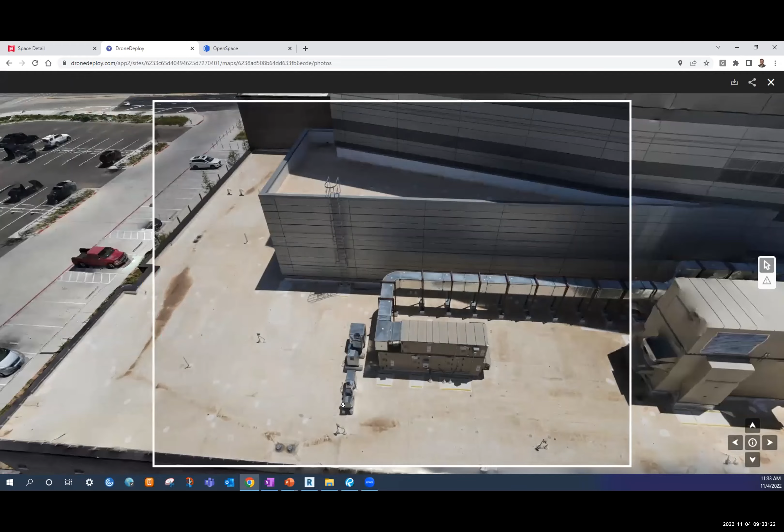But the software is smart enough that you can click the inspect button on an item, and it gives you the actual high quality image the drone took of that space. The inspect function shows the location where the drone took those photos, and the top layer photos were taken fully automatically by the drone—we preset the path.

We can run this every single week or every single day, and the drone can fly it itself. The ground photos are typically created by the end user, and I can click on any single one to get a high quality picture of what that looks like—very, very useful.

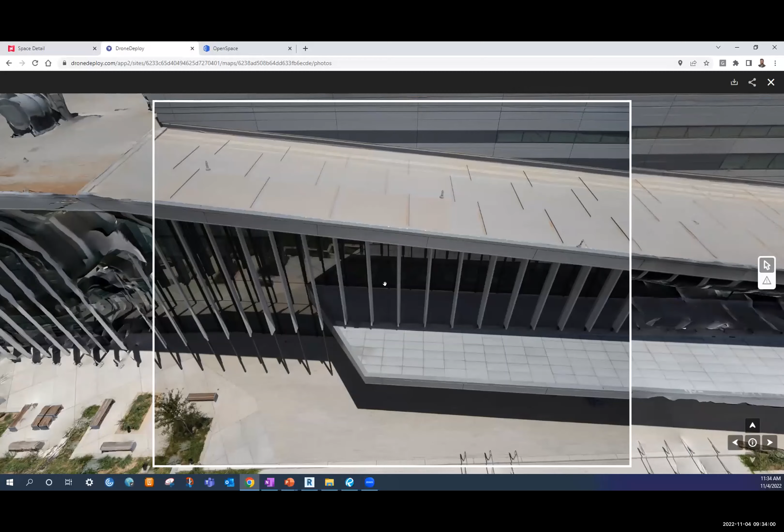Drones provide a great level of information, pulling in current conditions of the site during a construction meeting, for existing conditions, or conceptual and master planning. You can capture acres and acres of land very quickly and get something Google Earth won't give you, because this is up-to-date, today information of what this looks like.

When it comes to progress tracking, you can take in information—this is one of our sites in the UK. You can track progress of construction sites using that camera I showed you, mounted on my hard hat, which I have right here. 15 minutes gets you a walkthrough. You don't have to take photos; it automatically takes all the photos for you. You're literally doing what's called a video walk, capturing an entire 360 view of the construction site.

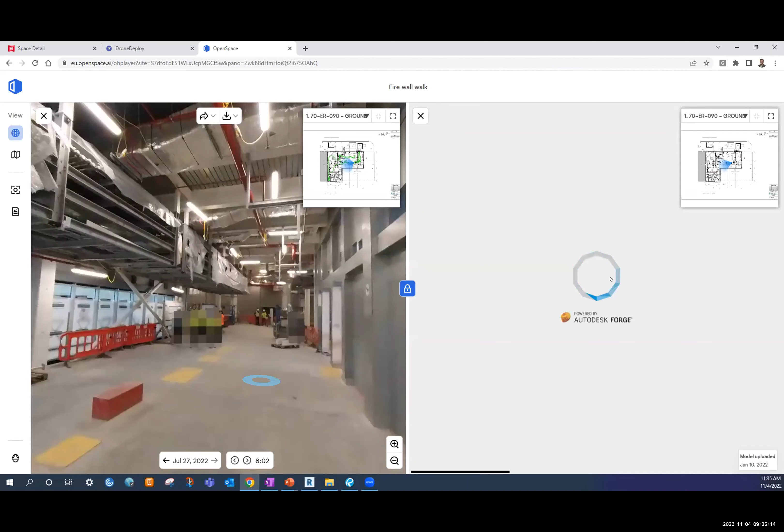What's even better is if you have that important 3D model you created, you can launch it automatically too, and it will compare the current progress of the project to that 3D model. You have full autonomy—you can see the 3D model here, and as I move one, the other moves along with it. You can turn layers on and off. This is directly from the cloud, and you can see the progress of construction doing a virtual inspection versus the model itself.

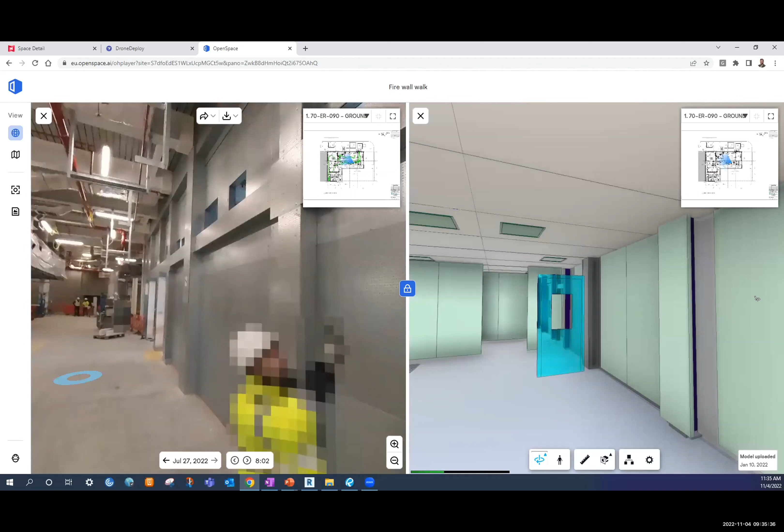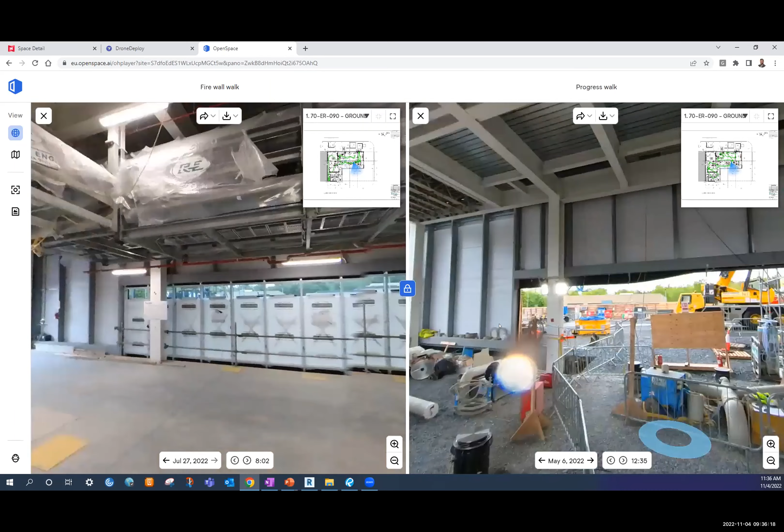If I wanted to, I could compare and have a historical backup—say I really wanted to know what was installed here at an earlier date. I can open and launch that historical view, look at the calendar for days this was captured, and see the condition from May of 2022. This is what the space looked like at that time. So you're able to log that perspective and compare the progress of one time versus another. Think how beneficial it would be to know exactly what was done, and when, on the project.

We're starting to use this more and more on our projects to have a historical backup of what's being done and answer any questions. You can take individual snapshots, jump to any single location on the floor plan, and it automatically gives you everything—where you're looking, where you walked. You can jump into individual rooms. It's very beneficial—quick reality capture that gives you a lot of insight through 3D models, and it's quick and inexpensive.

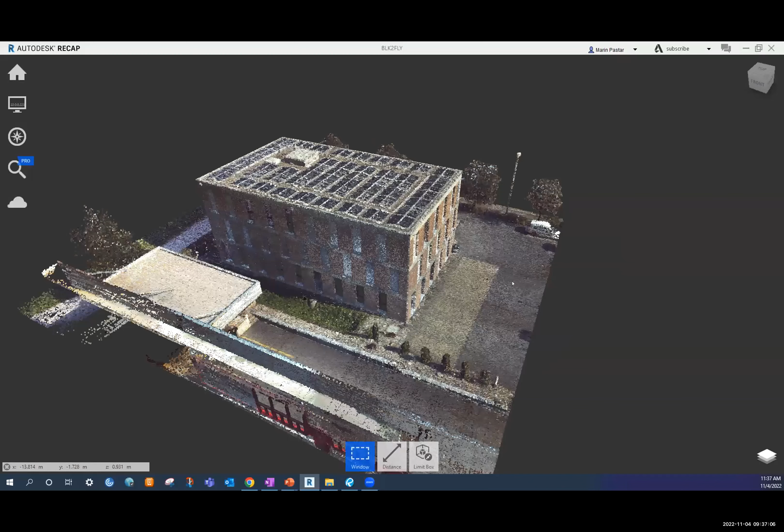When it comes to denser detail, this reality capture was created by an autonomous drone. The drone went into this space, preset to capture this building, and did it all by itself. This is high quality and can be fully measured because it's a laser scan—what's called a point cloud. You're able to import this directly into Revit and do a lot of different things with it.

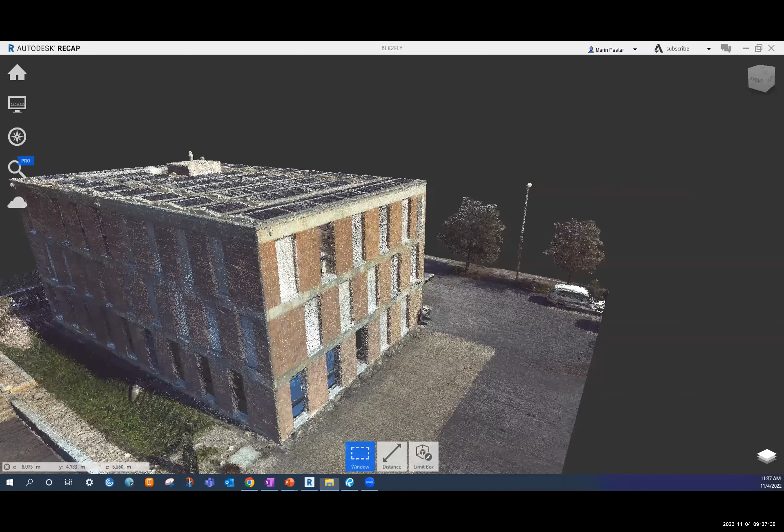There are a lot of applications for reality capture. I can't speak enough about it because I truly believe in it, and I think it's very beneficial to use on a lot of your projects.

Any questions about reality capture? I know I covered a lot there. We have about 20 minutes to go or so—any questions, any thoughts?

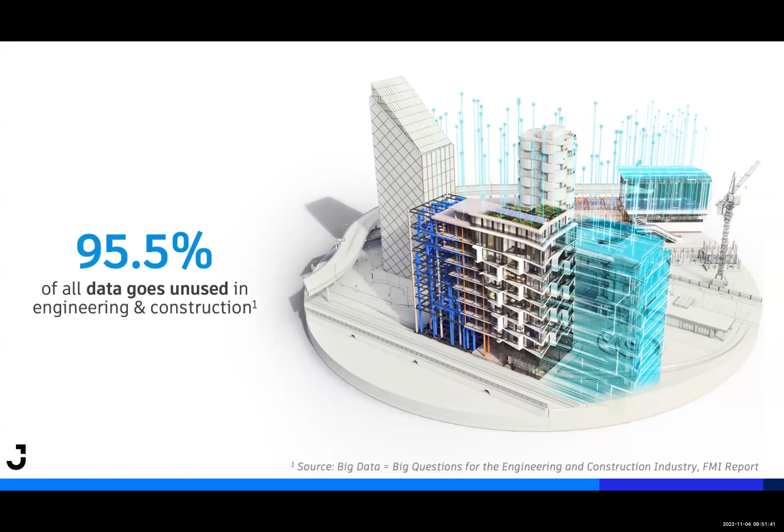And that's the problem. Through digital twins and this process, we're trying to enable our clients to use more of this information. And clients are starting to understand that they can't do that. So that's why this is a very, very current subject that's only going to keep growing, right? Digital twins—again, a lot of people have a conception of a digital twin as being a BIM model.

Well, it doesn't need to be. Again, I'm not going to get too philosophical here, but a digital twin is just a digital representation of a physical system. And that physical system can be a building, an asset, but it can also be a process. We can create a twin of a process if we want to optimize that process.

But for the most part of what we're talking about, with architects and engineers in our world, to our clients, I already showed you this slide, but we're talking about that twin that connects all different types of sources to a BIM model, and we can kind of assimilate everything together into one entity, if you will.

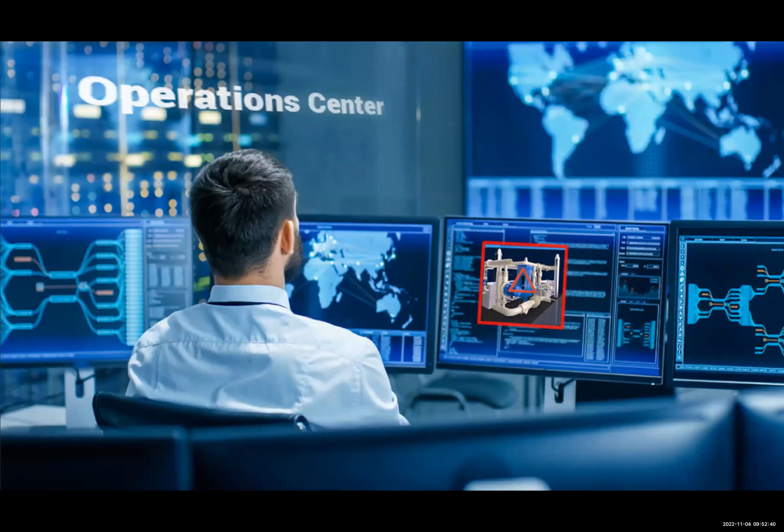A lot of our clients think of it as, they have their assets, they have a lot of different sensors. They want to understand how their assets are performing in real time, control parameters on their assets, be able to see their assets, having some sort of notion of an operations center that can operate their facilities remotely and be able to visualize every aspect of their system. Basically have this full total control in this operations center about their entire portfolio of buildings and assets.

And it depends, again, on what the clients are trying to achieve. Are they trying to track their resource utilization, uptime, life cycle, supply chain, life extension? This client really wanted to do this, and that was their digital twin. We really tried to create a solution for them. It's a very ad hoc, bespoke solution based on what they want.

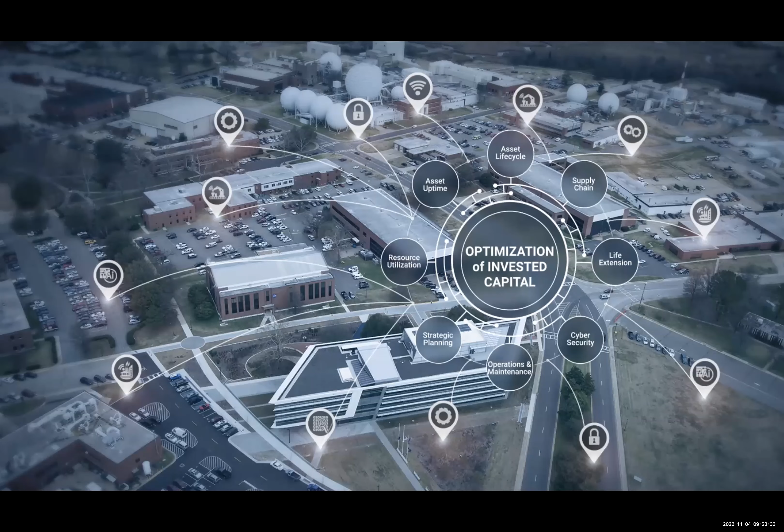And I can't stress that enough. There is no, you know, we're not creating one platform and saying, hey, this is the digital twin solution for you, and I'm going to show you what some other client did because you should do the same. Sometimes you can say that if they really truly are after the same thing, but you've got to go through that process of analyzing what makes sense to help their business, right?

And it's not helping that there's a lot of platforms right now that are arising as digital twin platforms. A lot of clients think, oh well, if I just buy one of these platforms, I'm going to solve all these problems. I'm going to be so much more operationally efficient because now I have a digital twin. Unless you have a reason why you're implementing it, that's not the case.

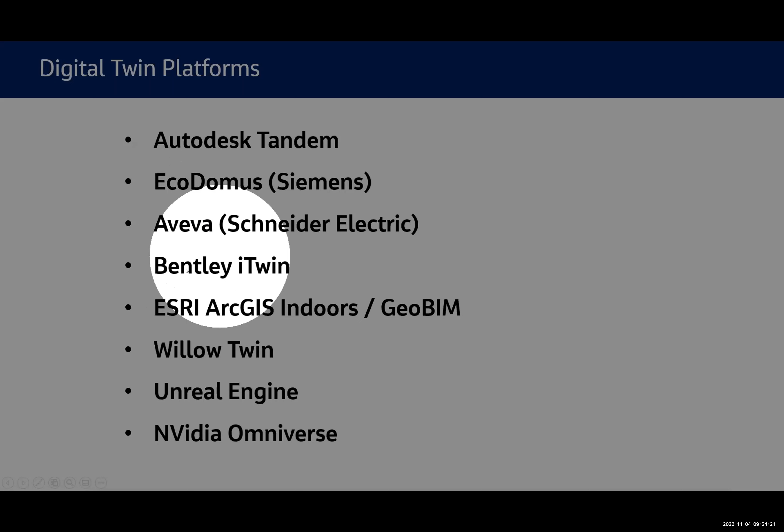But the platforms, I did want to bring up some of the platforms that are out there right now today. Autodesk has their own platform, Autodesk Tandem. And you'll notice big names, Siemens, Schneider Electric, purchasing platforms. Siemens purchased EcoDomus, which was a freestanding digital twin platform. Schneider Electric purchased Aveva, which was a digital twin platform. Bentley, again, Bentley is Autodesk's counterpart, they have their own platform, iTwin.

Esri has a big partnership with Autodesk, and they have several platforms: ArcGIS Indoors, which I'm deploying for a client right now, and GeoBIM, which kind of ties that BIM and GIS into one aspect together. Willow Twin, Unreal Engine, NVIDIA Omniverse. Again, there's a lot of big players that are starting to go down that path.

Are they ready? Are they mainstream? It all depends on what your client is looking for. That's my big thing about it.

I just did a class a few weeks ago, about a month ago actually, at Autodesk University. Again, I held a panel. I love holding panels because I want to hear what the industry is saying and what they want. But I held a panel in person called 'Have you started your digital twin journey? How and why?' And again, everybody's starting to get there. We had some owners, some architects, engineers, some technology providers. Repeated the class twice, had a great discussion about all of this.

It's all about guiding our clients to do it, not just doing it because it's out there, but doing it to align that to help our clients. I'm going to show you a quick video from several years back of what I created. A lot of people think about digital twins, they think of this.

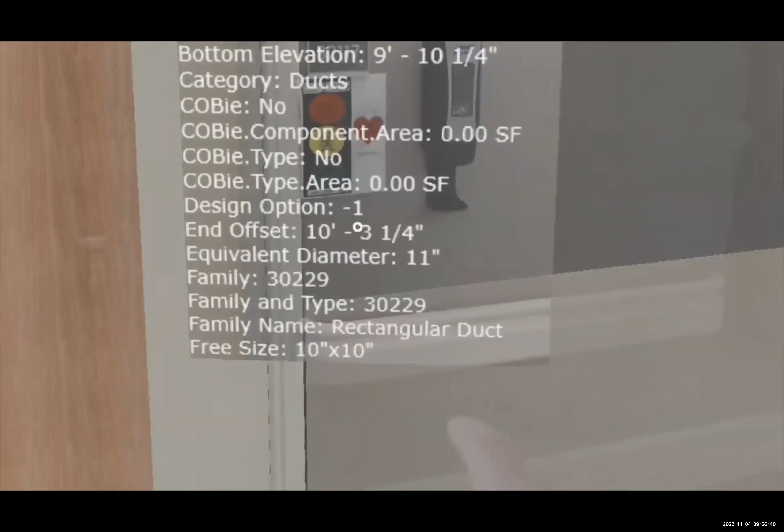But this doesn't happen just by itself. It happens through that process of capturing information, talking to the client, understanding what they need it for. This client hasn't fully operationalized this - I say that as a disclaimer - but we gave them the art of the possible, an understanding of what they can do as part of it.

Without us stepping up to the plate and really talking about what they can do, it's never truly going to happen. That's why I challenge each and every one of you. Hopefully you can take aspects of what you've heard today, try to apply that to your clients, and push it forward into, hey, have you heard about this? This can help you in these ways.